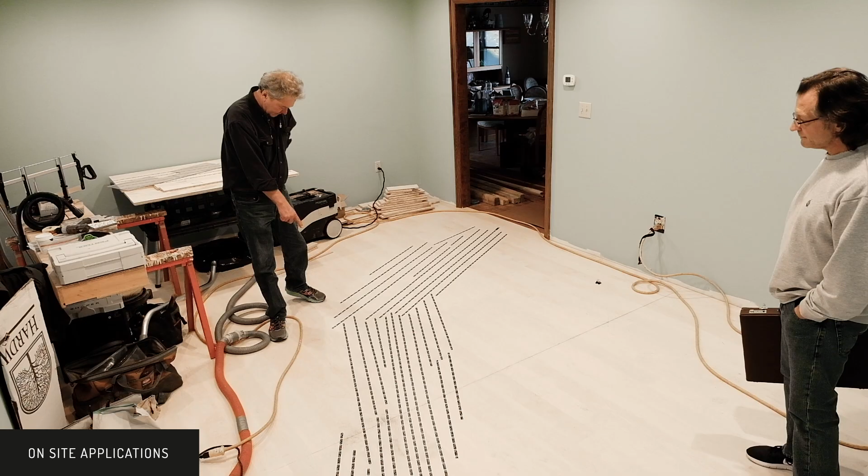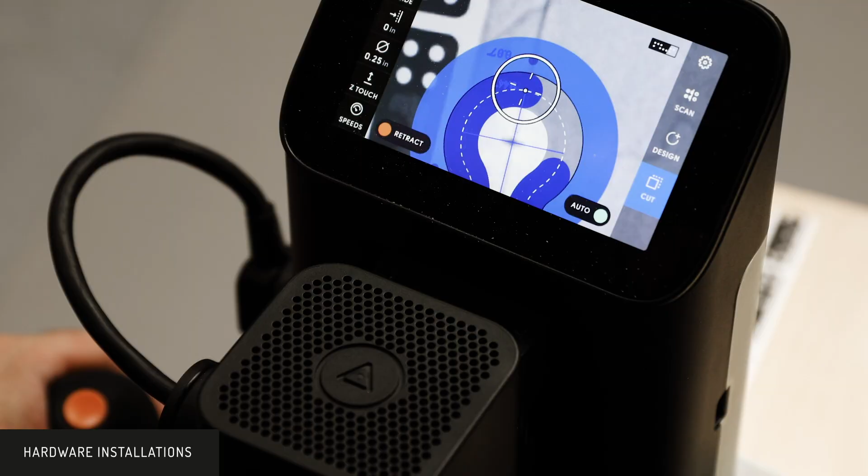Origin, handheld CNC, is designed for a huge range of situations, one of which is hardwood flooring. One of our customers, Mark Schaller, did this massive, 18 feet long, musical score inlaid into a floor, all live on site with Origin. It was actually done with a program called Adobe Illustrator, but you get the idea of the type of things we can do: inlays, medallions as we'll cover in this video, patching and repairing damaged panels, and hardware installation, be it vents, plugs, cable through holes, you name it. Origin can help with precision and accurate alignment and nesting of pockets and details in a very small, compact on-site package.

So this is what I'm talking about when I'm talking about medallions. These are all 3D renderings, but we'll have images of real examples for you to look at as well. These are all created in 3D using Fusion 360. I believe it's Jake and Noah who've been working on these. You can create the positive elements with the workstation in, say, quarter inch or less stock.

Set it up in the workstation using the shelf, cut the positive, and then cut the pocket on site. It doesn't have to be round, as is common with most medallions using traditional routers, templates and hole cutting jigs. We can cut whatever shape we want on site using Origin, with digital precision. So even things like coming back and removing another 1/1000th of an inch, we don't need templates. We get the precision on the job site, which is very uncommon for other traditional workflows.

Then there's the adaptability. We can change the fit with offsets, so we can take another 1/1000th of an inch off if we're unsatisfied with the friction fit or the glue gap we're looking for. There are often scenarios for various hardware where we can design everything on tool on the site, and we don't even need to bring a computer into the equation.

For this demonstration, we are going to design on a computer, and then we'll show the results of cutting it live. The process is: design on a computer, export all the parts. Then we cut the positive parts on the workstation itself — if there's a range of material, stock colors and things, you'll bring in the separate panels, cut all the components you want, and then cut the pocket in the floor, test fit it, adjust the offsets to get the perfect fit you're looking for, and then glue everything up, install, sand, and finish.

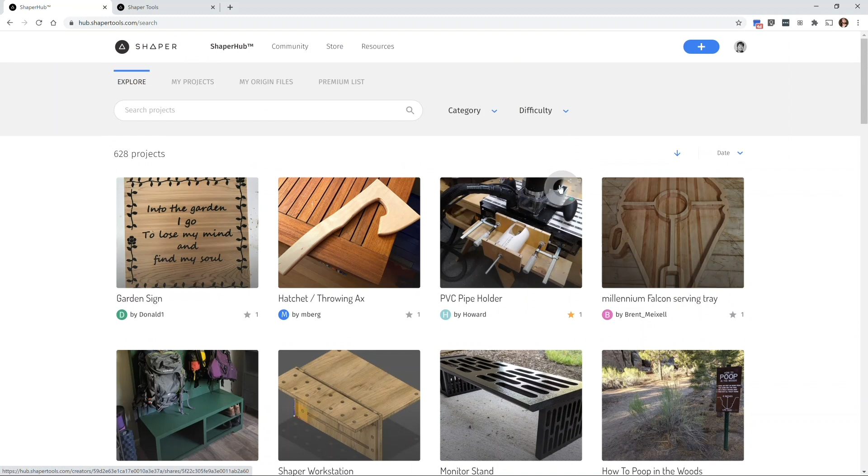So ShaperHub, I'm here at hub.shapertools.com, and we're looking at what customers have shared up on ShaperHub. We've got premium projects, a whole range of various hardware installs, cutter holders, you name it. The community is sharing projects, all free and can be instantly copied to Origin. We've actually uploaded a few — there's a section here where you can sort by category and type in flooring. So here's an example of one Jake did, another one. There's a lot of really cool stuff available already. I'm just showing you this because this is the way Assist will send you your files.

You'll have all the cut files here, the pocket, all the positives in the different materials, and the instructions for how to cut these files. This is the type of thing you would get back if you send in a project you wanted cut with Assist. It would be shared with you as your own private ShaperHub project.

Type in assist@shapertools.com and I'll show you how Assist works. You just submit your design request, receive a quote, and if you agree to the quote and the turnaround time, you submit it, and we'll send you back the project. That can span from logos, even just your signature if you want to add that to the bottom of your projects, and hardware installations, all the way through to full-on 3D designs.

The people working on Assist are very familiar with Origin workflows, so they'll help you navigate considerations like work holding and cutter selection. That'll guarantee you get a good outcome. I encourage you to take a look at that if you ever stall out.

And of course, there's always the community. These are all the different sections. You would go into design software and maybe click Fusion 360, then you can ask a question here. So long as you communicate what's going wrong, often the community will help you. And then there's regular email support to ShaperTools, support@shapertools.com.

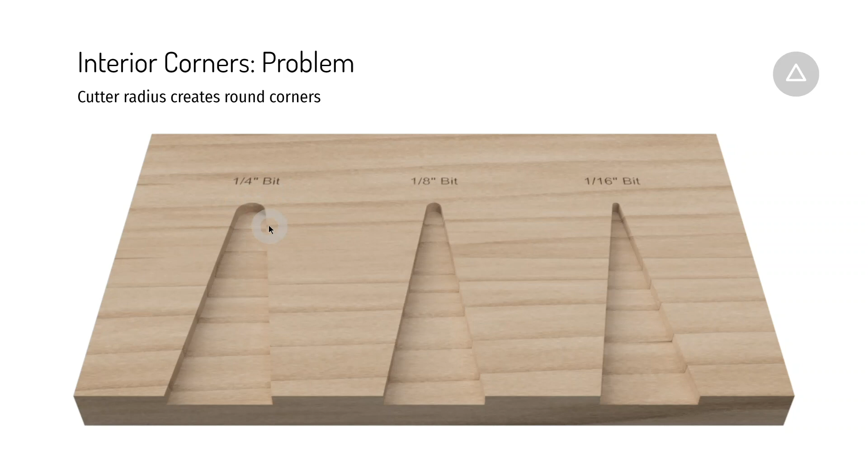Circular patterns. One other thing is we're going to be rounding corners. So even though we've got these points in this little star or compass inlay, if we were to use a 1/4 inch cutter, we'd get the corners rounded with a 1/8 inch radius. So obviously you can go to a 1/8 inch cutter, but it'll take you longer to cut that element.

Keep in mind, with Origin, you can change the cutters you use. You could clear all the center of this area with, say, a 1/2 inch cutter, and then come through and cut the perimeter with an 1/8 inch cutter to get you the details you need. You can take that further and go down to a 1/16. Just keep in mind there's a trade-off for how deep you can cut.

If you were cutting with a 1/64 of an inch cutter, the depth it would cut to would be, say, 3 times the cutter radius before it starts to get too unstable. So chances are that's not going to be a great idea. The alternative would be maybe you just want to chisel out those corners and keep them really hard-edged.

If you're happy with chiseling both the pocket and the positive element, you see how the corners get rounded in different ways - the inside corner is always where the material gets left. So if we were to bring these two elements together without chiseling the corner, they wouldn't fit, because this material would collide with this hard point. And likewise, this hard corner would collide with this rounded corner.

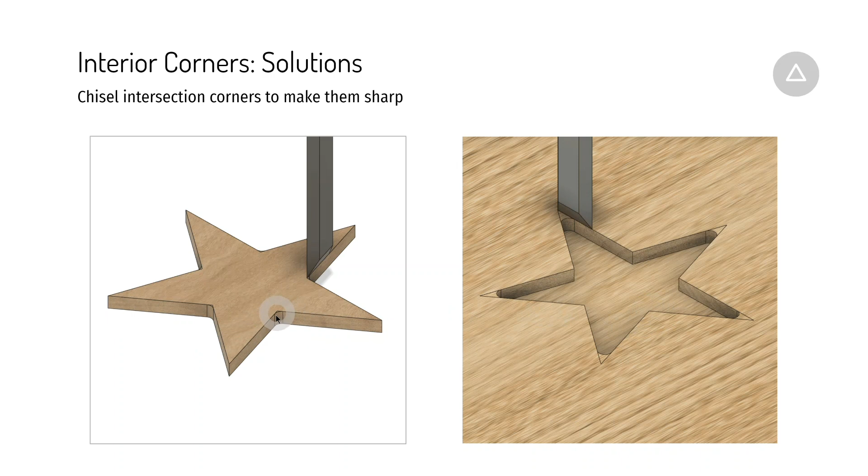So we'll get to Fusion and kick this whole thing off. Here's what we're presented with when we start Fusion. I'm in a 3D view. I'm just going to turn on the Origin over here - you can turn it on by clicking on these little eyes.

You can expand these, and this shows you all of the elements. So I'm looking at XY planes, lines, and the center point. This is what makes up the Origin - not ShaperTools Origin, the 3D Space Origin. So this is 0, 0, 0 in X, Y, and Z.

I'm going to show you here, up in the top right corner, how we can navigate. This is called the view cube, and it enables us to just orbit around. This is one of the ways to navigate.

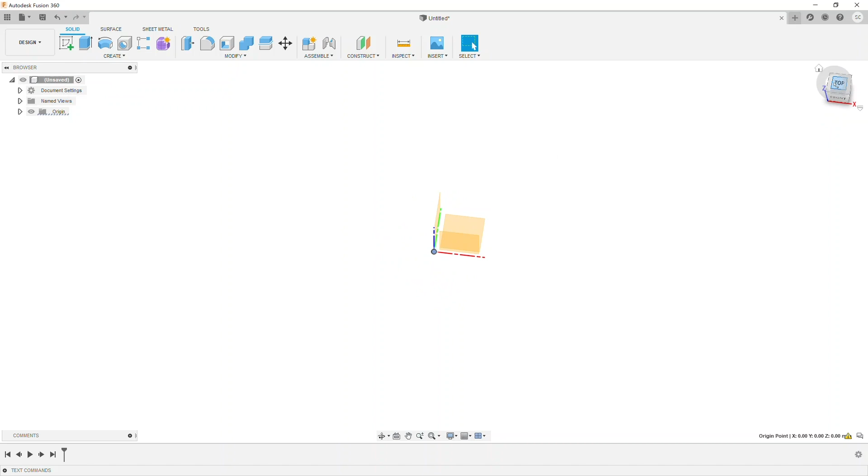And it's a quick way of getting a feel for where you are in 3D space. So if I want to view from the front, just click the front. If I want to view from a 3/4 view, I highlight that corner and it'll rotate around. If I want to view from the top, click that. There's also rotate left 90 degrees, right 90 degrees, go to the home view. There's a bunch in there to investigate. We won't get into that for this one.

The other way I navigate is with the mouse. So with the scroll button, if I click it down and drag, I can pan. And then I can zoom in and out. Just a heads up, the Origin doesn't zoom as a 3D object.

I'll just quickly go here and change my document settings to inches. Okay, that just means that every dimension I create is going to automatically be in inches. You can mix and match much the same way as you do on Origin, millimeters, inches, whatever dimension you want. But just for simplicity here, we'll get that into inches as the default, and then I can collapse that.

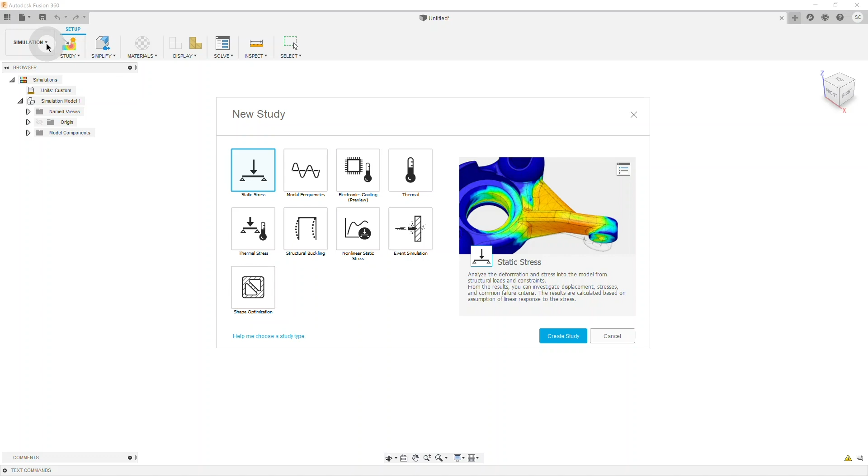Up here, I'm in design mode. So there's a bunch of other ones. If you ever end up in a strange one like simulation, this is all going to look very foreign. For all the Origin work we're going to do, make sure you're in design, and then most of it is going to be in the solid menu. So we're either going to be creating sketches, 2D drawings, or manipulating solid geometry.

So there's other options, surface, sheet metal, and one more to note, tools. This is where the Shaper add-on is. So this is how we export geometry to Origin. So it's a tool. This is where Autodesk presents it. We'll get to that later though.

So design mode, we're going to create a sketch. So that's the same as this button up here. First, we'll talk you through the shortcuts at the top of this menu. Then we'll show you all the options available down in the menu itself. And then I'm going to start using things like this, the shortcut.

So if I want to do an extrude, I can click here, or I can just hit the E button on the keyboard. And you'll notice beside a lot of these, there's shortcuts. So to keep things quick, we'll get into that. I'll show you what I mean by that. If I was to do an extrude, hit E, you'll see here my little screen thing is going to tell you what keys I'm pressing. Also, you'll see here the extrude options have come up, and you'll see up here the extrude button is active. So if I go cancel or escape, I can get out of that. So now I'm back to select mode.

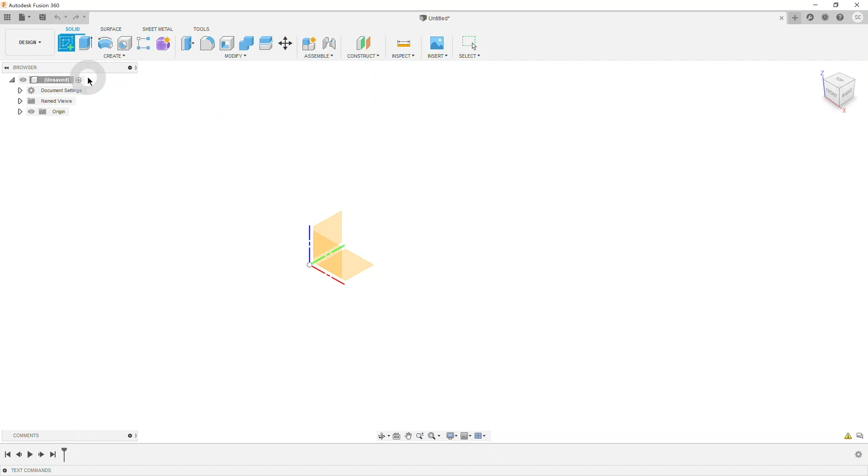So first things first, let's create a sketch. So I can either do it with this button here under solid, create sketch, or this button here. What we're going to see here is a lot of what happens in the viewport. Fusion's going to try and tell us what it wants from us. So I've activated the sketch mode, and you'll see here my cursor, if I hold still, is now saying select a plane or planar face. And you'll see down here it's kind of defaulted to whatever I'm selecting with the origin itself. So I actually want the XY plane.

So now it's going to zip me around. I'm viewing from the top. So what I mean by that is all it's done is moved my little view cube, or moved my camera, so I'm looking straight down on this plane, kind of like a plan.

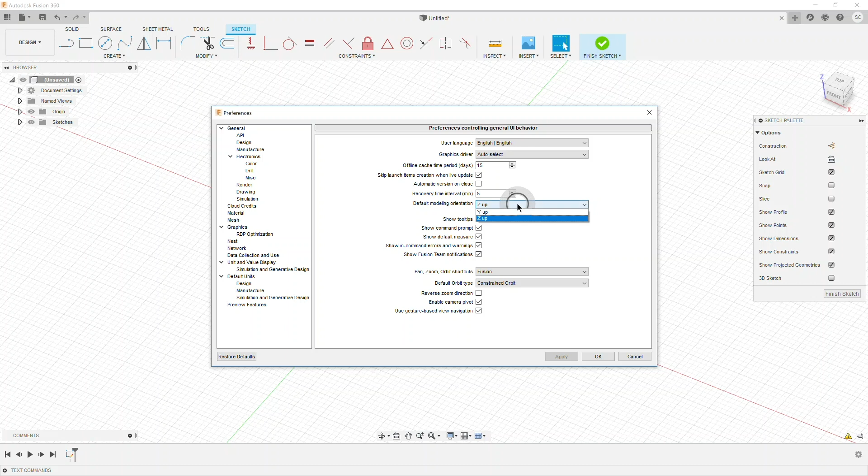Now you'll notice in my one, Z is up, so I'll just show you what we're doing here. So I've just gone to my profile and the preferences section, and then in the very top level under general, there's orientation Z up. So the alternative there is Y up. I believe Y up's the default, but for Origin and a lot of CNC work, Z is actually the vertical axis. So when we talk about Z and Origin, we're talking about the cutter moving up and down.

So Origin rests on the XY plane, this plane that we're drawing on, and the cutter moves up and down in the blue Z vector axis, however we want to refer to that. So we are now in sketch mode on the XY plane. It's created this menu here. Once again, get familiar with this, open it up if you ever don't understand what's going on.

Everything in your file is contained or represented in here as a little drop down. So, the origin has all its elements, named view, top, left, right, they're all there. And then our sketches start to populate down here. So this is where we start to create our geometry that we're going to then extrude or convert into 3D geometry. So this is just 2D lines.

And you'll notice down here, this is our history. So as we create more elements, they're going to accumulate down here. And we can actually, with this little bar, scrub through time to go back and edit things earlier in the design process, should we change our mind.

So with this sketch active, we notice we've left solid modeling and now we've moved to sketch mode. A quick thing to check, I always do on the right-hand side. If I'm ever in sketch mode, I'll see this big green button to finish sketch mode. So these all are settings, either creating, modifying, or constraining elements in 2D. So that's what we're going to manipulate in sketch mode, and we can get right to it actually.

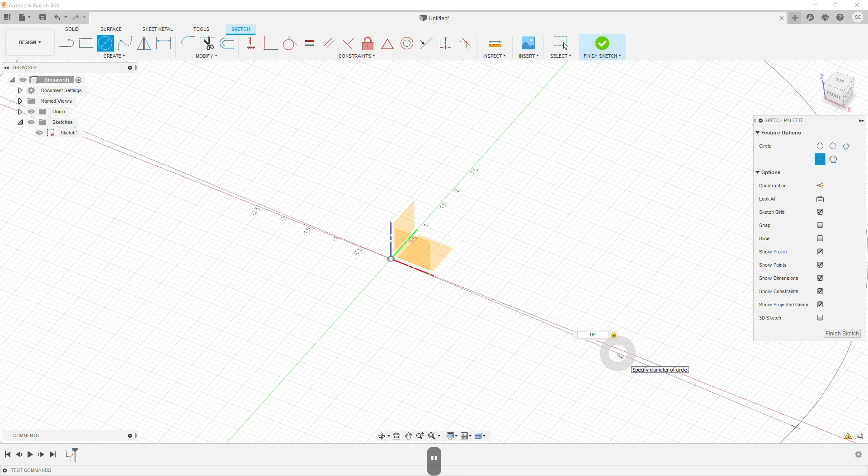You'll also notice as I'm entering this, the fact I've entered it, it locks that value. So you can see the little yellow lock symbol next to that data entry, and because I'm in an inches project, I don't need to enter, like I could do it like this, but I don't have to. The whole project is in inches, so it's going to assume inches if I just do 16.

Right, so now zooming out with the scroll wheel and the center scroll button to move around to center it. We can also do fit, and we'll automatically fit to our geometry. This is where we do a lot of the view manipulation as well as the view cube. So we have a 16-inch circle. Notice I can move this diameter. So this is called a dimension. I can move it. Doesn't matter where it is. This is just a value attached to this.

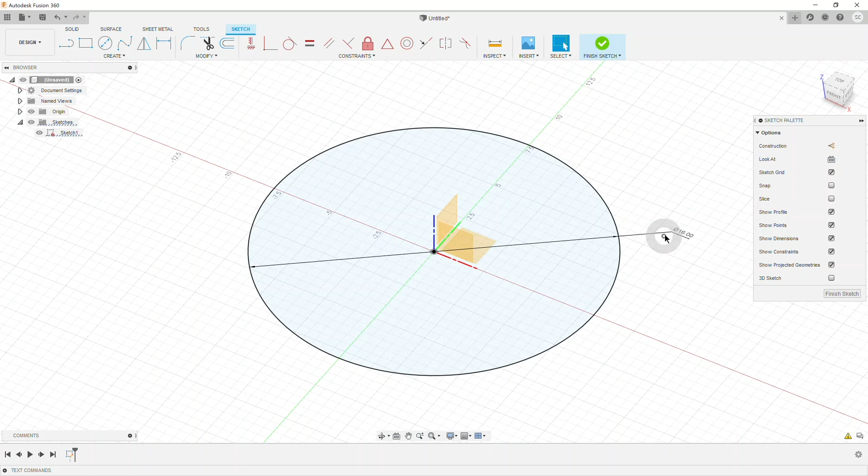I can actually also right-click on it and say toggle radius, and it's going to switch to half the diameter, which is the radius. And we can always toggle that back. I can also delete it. So see how it's highlighted blue? I've clicked on it and then hit delete. And you'll notice my geometry now goes blue. So it was black, which meant it was fully defined or fully constrained.

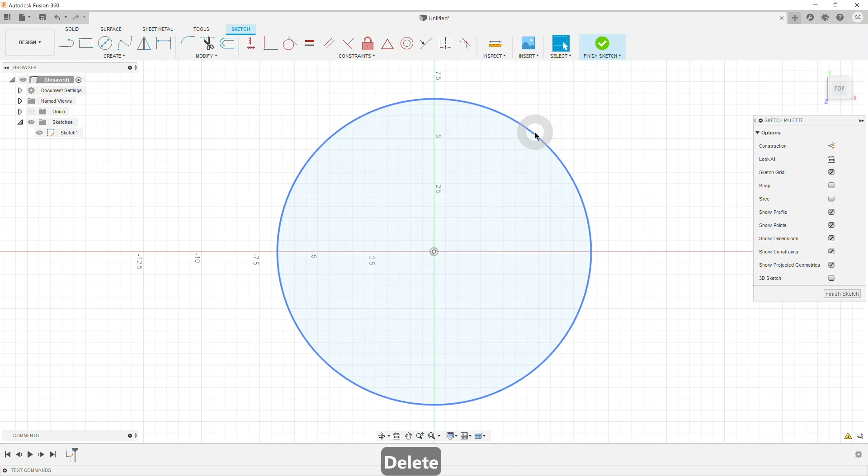So we are constrained to the center. That's actually this coincident constraint. I'm actually going to view it from the top down for simplicity, and I'm going to hide my origin. So you'll see here, the center of my circle is constrained to this center point, which means I can change the diameter now because I've removed that diameter value, but I can't change the position. It's locked to that. I could then go in and highlight that constraint and delete it. So I hit the delete key. Now what we have is a circle that can be moved anywhere.

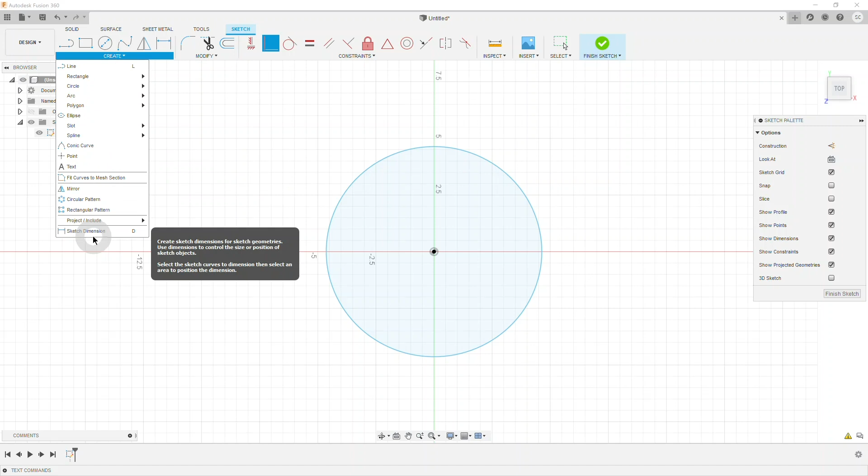Now I can take that circle and set up those constraints again by hand. So I can go, I want to make that center point coincident to the center of my world. And then I want to make my dimensions. So the D is under Create, Dimension, and then I just highlight the object I'm dimensioning, and you'll see it's now defining a dimension. I click where I want it to be drawn, and then I enter 16.

So we're back where we started. We have a 16-inch circle, and it's constrained at the center. So it's rendering as a black line. Everything is as we wish. I hit Escape to get myself out of that dimension mode.

And now there's one more thing we're going to add here. This curve is producing what we call a profile. Just keep that idea of a profile in mind. We're going to move on to creating a line. So that would either be under the Create Line shortcut or Create Line. We can use the L key as well under the Create menu.

So with that active, if I hold my cursor still, it says Place First Point. And if I highlight on the line, you'll notice a little cross pops up. So that means I'm constraining to another curve. So instead of having to, create a line like this, and then I'm going to go Escape to complete this. Now these points are just 2 points floating in space. I can move them wherever I like.

I can then go Constrain to there. So that point now is constrained to this curve. I'm still in constraint mode, so I'll hit Escape. What that means is I can move that anywhere, and so long as it's on that curve, it will draw and adapt to where I drag it. And the same applies to the top. So I can go Constrain to that. So now I'm constraining to, I'll hit Escape again.

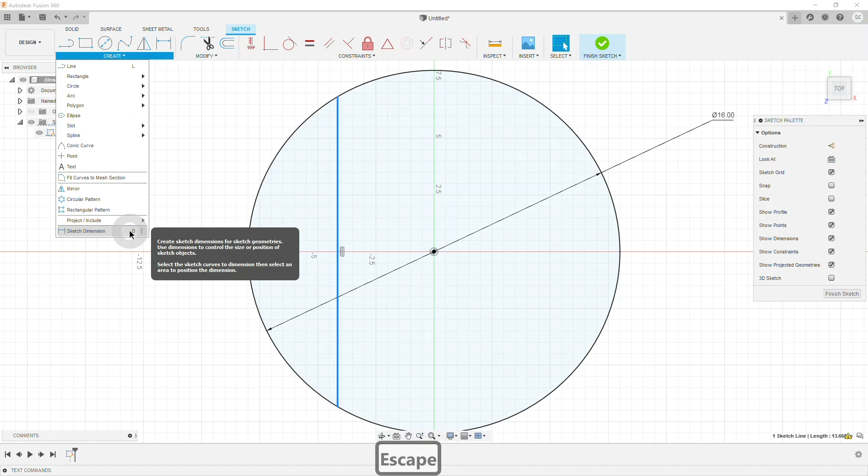Now I can tell it, I want this line to be 10 inches tall. And you'll see now it's got constraints on it. So it has to be vertical, has to be constrained at the top, has to be constrained at the bottom, and has to be 10 inches. So now it's no longer a blue line, it can only be there. It actually could be over here, but we'd have to reconstruct it to get it over there. Now we can also do things like, I'm going to delete that length. So now you see it goes back to blue.

Now I'll do D for dimension again. So I've selected the line. It's going to assume I'm measuring the length, but I could actually then select something else. Now you'll notice it's measuring the distance to that center. So I could tell it I want it to be 3 inches from the center. That's now fully constrained. Because my circle's constrained at the center, top, bottom, vertical, there's no other way that can resolve. So that's the basic idea of that.

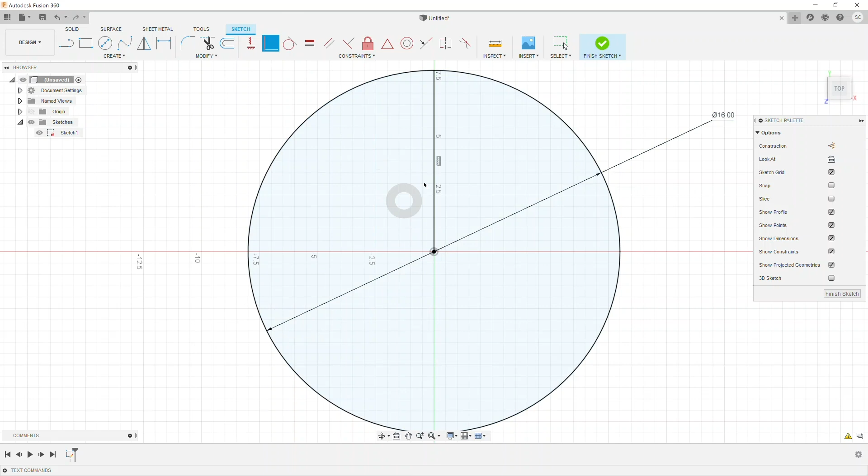I want this line to not be constrained to the bottom. What I want is to move this point and constrain it to the center. So I'm going to go Constrain to Center. So now, once again, that is a fully defined shape, fully defined line. And now we're going to start to use this to construct our compass.

So let's see here. I'm going to go Create Circular Pattern. Ordinarily, we sort of shy away from patterns and things for a while, but for medallions, it's just such a fundamental concept, we're going to get right into it. So it's taking a defined line, and then it's going to rotate it around here and duplicate. So I'm going to choose the center point. It defaults to 3, and we want 8.

So now we have lines all the way around. We go OK. It's a little confusing in that we have this line, but you can see there's 8 lines. And what's also cropped up here, which is actually quite interesting, is this pattern info. So we created 8 new elements that rotated around this center point when we did that pattern. If I double click the pattern icon there, I can adapt that. So I could go, oh no, I want 7, 6, 5. We'll put it back to 8.

Just keep in mind, inside your sketch, all of these little icons, so you can see here, it can actually get kind of frustrating. The constrain to center icon is almost overlapping with the pattern icons. You just have to move a couple of pixels to get exactly the one you want. So you can go in and edit that.

Notice we still only have one element in our history. So whole sketches are treated as single history elements. That's good to keep in mind. So it's a good idea to often keep your sketches as simple as possible, just because they only present as one thing in your time history. So now we're going to get into more of what we've just seen.

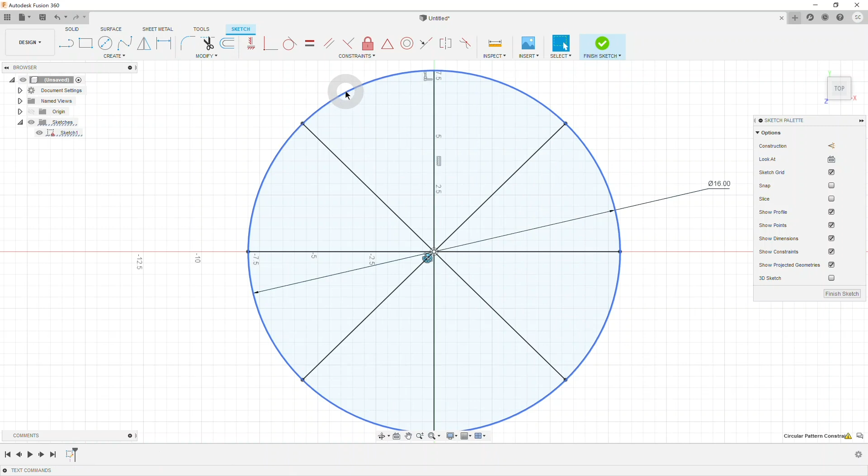I'm going to make the outside one a construction line. So what's changed here is this has gone from being a full geometry creating line to a construction line. So we can toggle back and forward between this. The dotted line is a construction line. And what's different there is we now create what are called profiles. The diameter thing doesn't contribute to profiles, but all geometry that intersects and creates closed shapes contributes to profiles.

So what's really cool about this is these closed shapes get really powerful with Origin, because that's exactly what Origin uses as well. We want to create often closed vector shapes to create our geometry that Origin cuts. When a shape's closed like this, we can cut a pocket, we can cut on the outside of the line, we can cut on the inside of the line. Everything there is closed and complete in a way that Origin understands.

So if we go and turn this into a construction line, you'll notice it no longer contributes. I can't select these areas because they're not closed shapes. It treats the construction line as an open shape. So as we start adding more lines to this, we'll be creating closed shapes with the goal of creating geometry from them that we'll send to Origin for cutting.

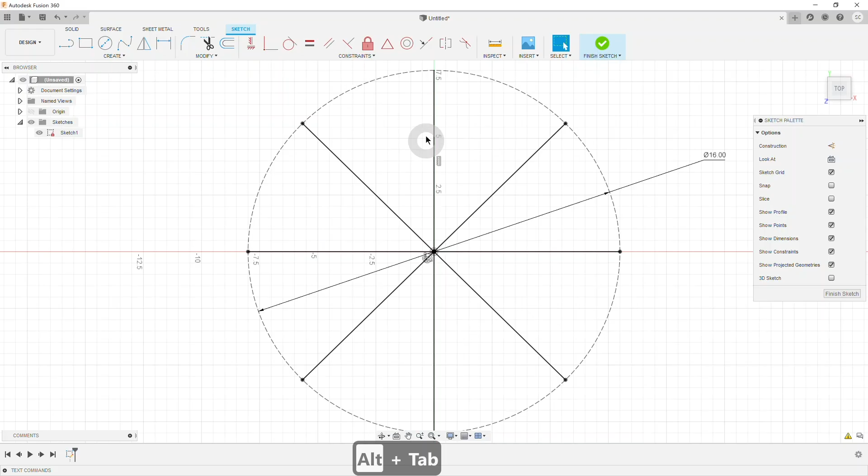So now we're going to create the little vertical elements. I'll actually zip back to our demo. At the moment, we just have the big main lines here. We're going to start to create these lines and get them all constrained and ready to go. So we're going to start at the center and work our way out. And then we're going to add little radius details here, here, here. We're not going to spend a lot of time doing each and every one of these. We're just going to do the unique ones at the top and then duplicate them using that same rotational pattern technique. Let's create a line.

Because we've made this diameter 16, we know we can snap to that top point. You'll see it turned into a little square. And then we can either enter data for the length, or I can just snap to another point like this. And now I have a line. I'm going to hit escape, otherwise I'm still in the line creation mode. And you'll see it's constrained at the top and it's constrained at the bottom. So I can move this. The reason I can move it is because this one's blue, it's not fully defined.

But we know that that is the way we describe where this is; we're going to draw an arc between these two. So if I hit the D button, which is the same as going create dimension, I'm going to click on this element and create a dimension. So that one is 6 degrees. Now you'll notice it's gone black. It's fully described. I'm hitting escape again to get out of the dimension mode. And now with this shape, I've started to create my actual geometry that I want for my final export.

So I'm going to just do its mirror. We could mirror it. So L, and then dimension, enter. I can actually, this is fun. Rather than hand entering 6 again, I can click on another dimension. So it's saying dimension 9, which is that one, and then hit enter. So it comes up with a little FX. I'm going to go escape, move that down, which means it's inheriting from that. So if I change this to 12, you'll see that both of them update. So I'll put it back to 6, and it updates. We are good to go.

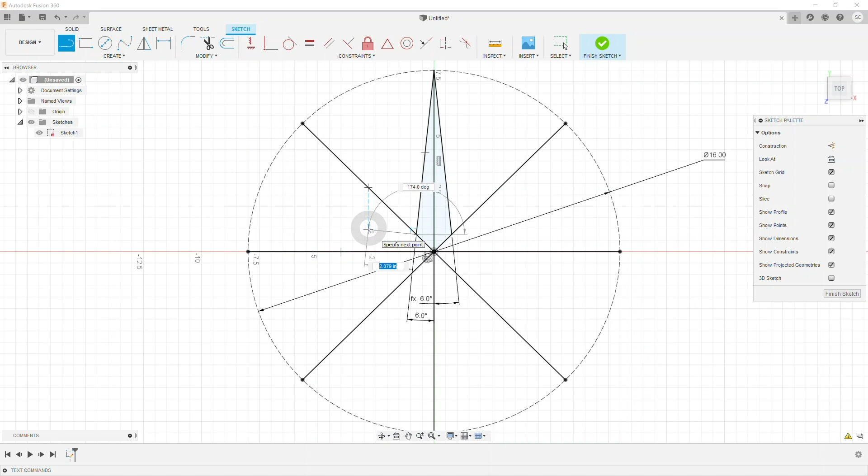Now I'm constraining it to this line. You'll notice a little 90-degree angle popped up there, so I could constrain it to that other line at 90 degrees. There's another 90 degree to the arc up here, and it can also be collinear to itself. Often, if you hover over a particular line you're interested in, and then move here, you'll notice it will prioritize that line.

So whatever line you've highlighted most recently, it will try and do a constraint related to it. You can see I'm parallel to that line down there. For this one, I'll just get it up and running. Now we've got 3 of those, called profiles, areas we can create solid geometry from, and export data from, should we want.

Now we'll do the secondary little points, so we'll do these guys. They're 3 inches out and 8 degrees from the center. So 3 inches from that point to the tip, and then 8 degrees on either side.

I'll go L, and then I can put this anywhere. Oh, you'll notice this one's a good one—this triangle means it's in the center of this line. So if ever you see that, you're snapping to the center of a line. That one gets pretty handy.

But because I'm going to use constraints to define this, I'm just going to put this in casually wherever I like. I'm still in draw mode, snapping to that point—see how it becomes a square? Then just bring it down, snap to this line. That little dash tells me that's aligned to that.

So then I can go D for dimension. I don't want to describe the length, I want to describe that arc, and we said that was 8. We'll do the same on this side.

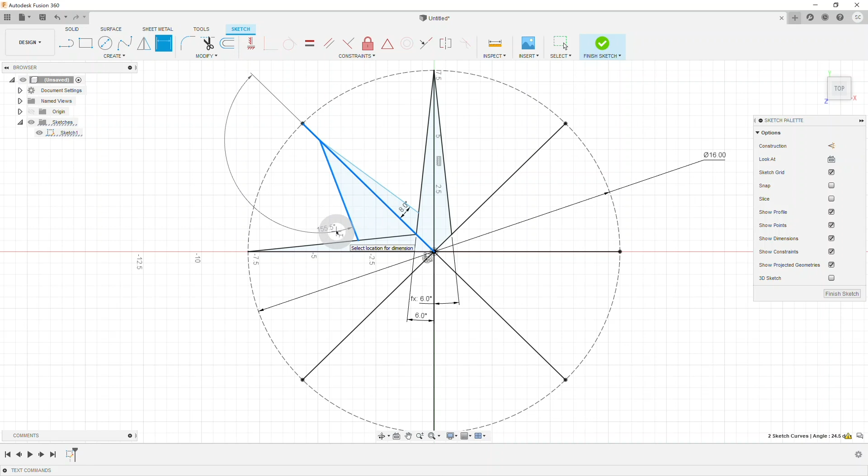I'm still in the dimension mode, and if I click on the outside, notice I'm describing a different arc. So a lot of these things are based on where you're clicking. Just be mindful of what Fusion is trying to tell you as you click—move around and look for a spot that's constraining to the right elements or measuring the right arc.

So to define it fully, we go there. Now this is interesting as well—I can define my dimension to be vertical, to be the hypotenuse or whatever, the total length, or horizontal. Just keep in mind, once again, move around and Fusion will tell you what it's trying to do.

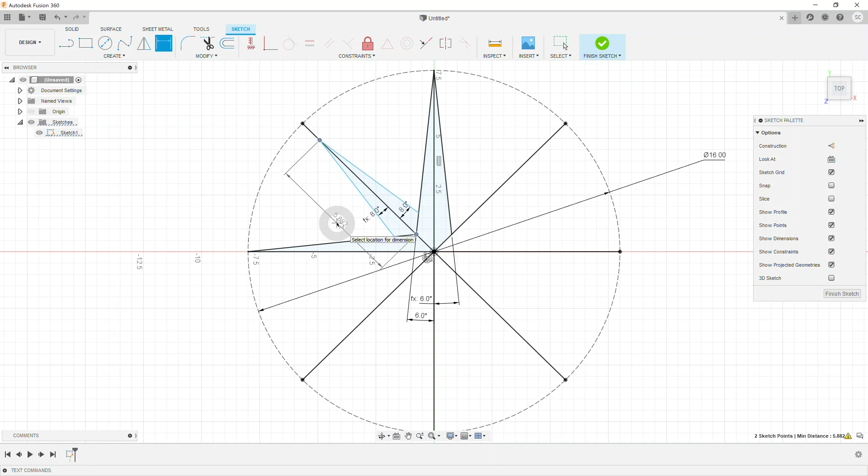So if I click here, I get 3 inches, and now these are the unique elements, 1, 2, 3, 4. We got one little star in the middle, so I'll do that as well—this little star, where 1.181 is the length from the center, and it's 16 degrees. Let's just arbitrarily click there, on the line we know we want.

So now we get escape. If I select this, we know our constraints are correct. Now it's a matter of entering our dimensions.

So I've actually started with the line selected, so I'm going to hit escape. What I actually want to measure is the point to the center. So D, and then select the center. Come over here, 1.181. Still blue.

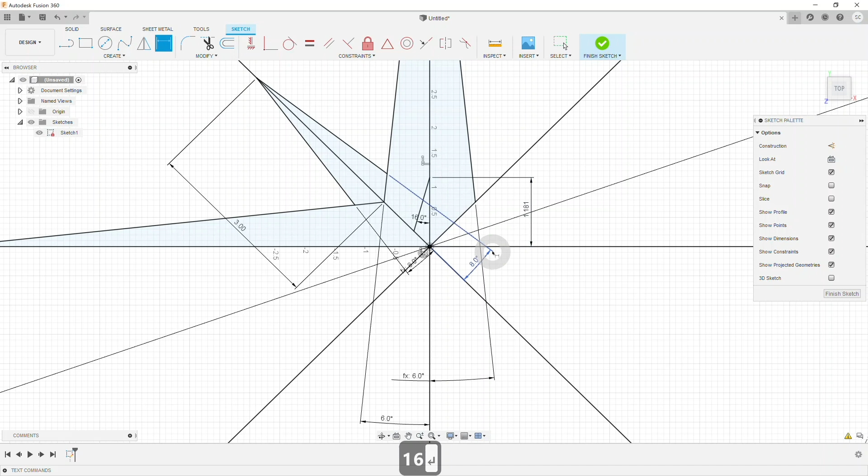We've got some more to describe here, so I'm going to select that and tell it it's 16 degrees. Complete it with this. Now if I come over here, it's going to dot a line, so I can be constrained to that, just matching that. But if things change, this is not constrained to that—it just matched that. So I'm going to do the same as we've been doing: dimension the angle and then select the angle it's the same as.

We could do stuff with mirrors, but we'll keep it as simple as possible for now.

Right, so I now have enough geometry to get this process underway. So let's leave the sketch.

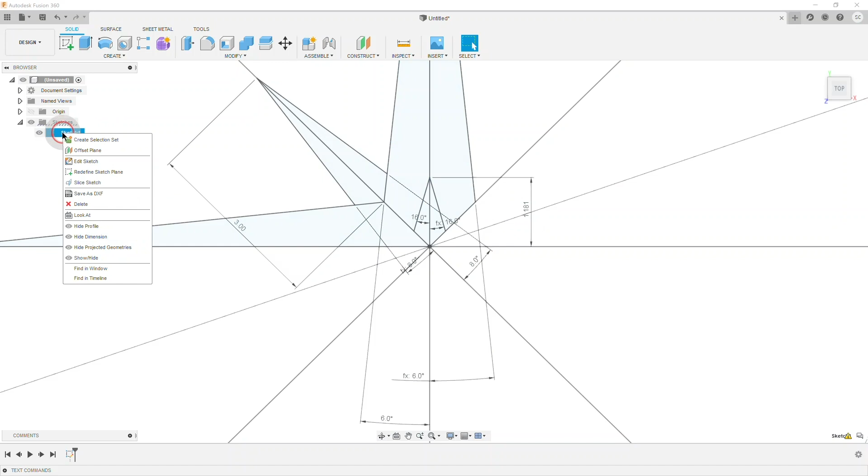You'll notice we've gone back to solid mode and our sketch dimensions are no longer visible. Should you want to see them, they get pretty cluttered once you have a bunch of sketches going. You can right-click on the sketch and go Show Dimensions. So even though I'm not actively editing this sketch, these dimensions are visible. I'm going to hide those and zoom out.

I'm also going to hold down, this is another navigation tip, on Windows, Shift and middle scroll wheel lets you orbit. It's the same as grabbing the View Cube or the Orbit button down here. So there's several options for all of these. I like to use the shortcuts in the mouse, but you use whatever works for you.

So we now have this profile and this profile. I'm going to extrude this. I can click the E button, or click this button up here, or find it in the menu under Create. We'll use the menu option.

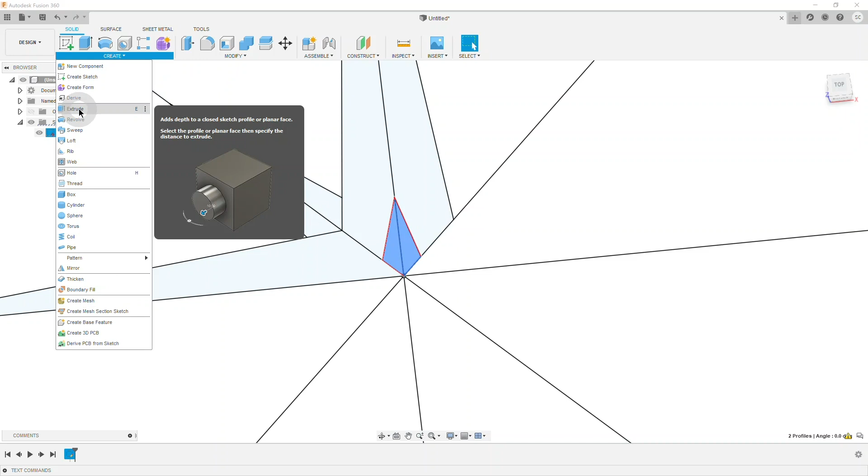You notice this is highlighted, and our settings for Extrude have highlighted. If I hold my cursor still, it says select sketch profiles or planar faces to extrude. So I can either add more or select them again to remove them. It's pretty quick to get up and running, and you'll see here every time I add or remove one, this is just left clicking, this number goes up or down. So just double check you've got the right number of things active here, and we should be good.

Now, one other tip that's kind of cool: if you're working on a sketch, it's tempting to do a positive extrude, but then if you're doing more work using that sketch, the bodies or geometry you create, we'll do it positive just to show you, 0.25 inches. So I'm extruding up towards me above the sketch, but they're going to occlude the sketch. I won't be able to see the sketch once I accept this.

Well, there's more to it than that. When you create geometry from a sketch, you might see it like this. Everything looks fine, but your sketch vanishes. So if I turn the sketch back on, I can see it. Now, the problem here is I can't really interact with my sketch properly anymore. I'm selecting, you'll see there, I'm selecting the geometry instead.

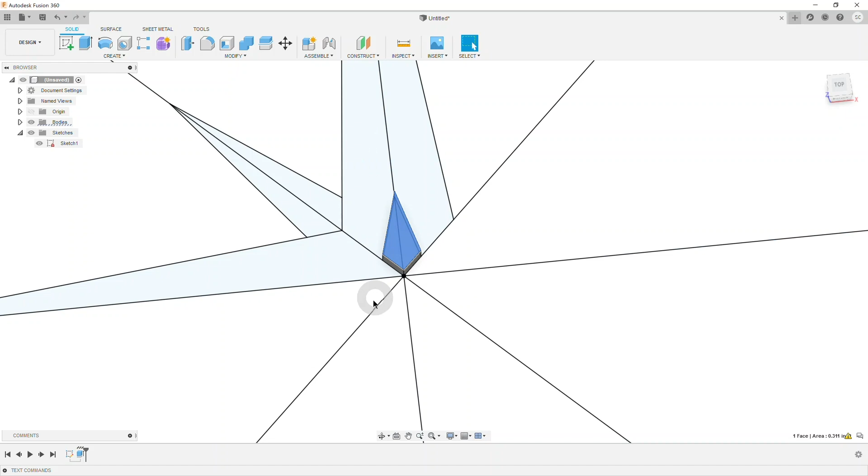So what's cool here is we've created the extrude positive, so it's above the surface, but it's created a history feature here, which is the extrude feature. So if I right-click on that and go Edit Feature, you'll notice all of my settings are still available, so I can go back.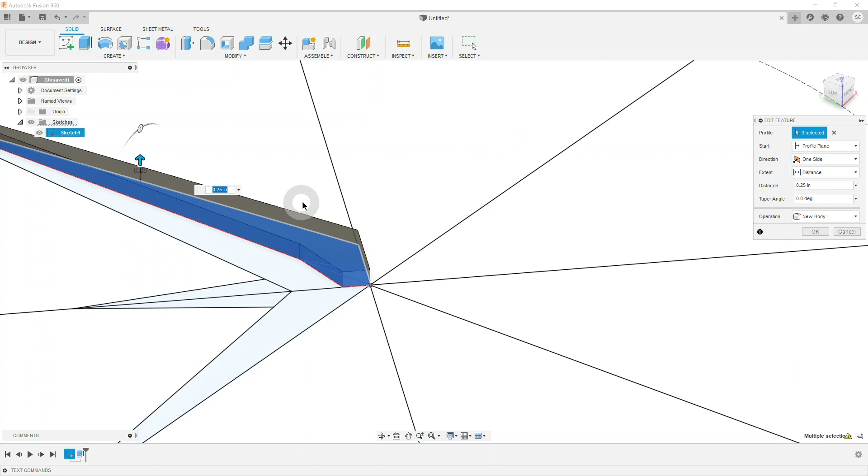One thing to keep in mind, if I hold down Control, on Windows anyway, the feature vanishes and I can select more elements. We don't actually want to do this, but just see that's an option. So Control lets you add and remove in the feature menu.

Now, I'm going to want to make this negative, so we're going to go negative 0.25. This is kind of handy in that now the sketch is on the top and everything's below it, kind of like what we're actually creating on the floor. So just keep that in mind as an option.

So these are all the settings. We can have an offset plane. I could do this below the surface, so 0.2, negative 0.2. So there's a lot of different options here for how we create our offset. We actually want to do it using that 0,0 plane as our reference.

So I just encourage you to get in here and experiment, especially given we're creating features here that can be edited later. There's no harm in experimenting. You can always go back to what you were doing.

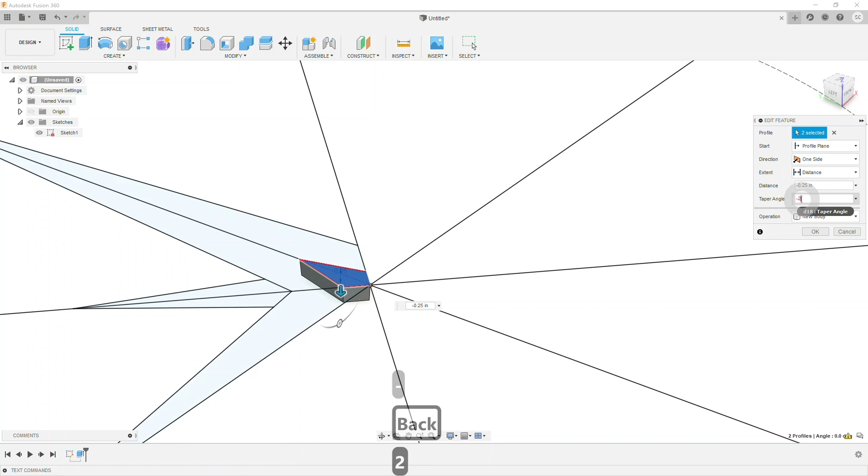We won't get into the weeds here. We're just defining a distance we want to extrude. Negative is down, and we can taper it if you want a draft angle or something. So 2 degrees, you'll see that. Update, it's getting wider. Negative 2 will get smaller. We'll do negative 20 to exaggerate it. We want 100% vertical lines, no taper here.

And then what's interesting, we'll find in future, keep an eye on this, new body is what will happen if this is all updating live. So if I had geometry that existed here, I could either be joining to it, cutting into it, intersecting it, or creating a new body.

If you're going to use these elements later, chances are you're going to want new body. But just keep in mind that Fusion's going to try to select one of these for you based on what it thinks you're doing. Once again, if you get it wrong, you can just right-click here, come back and change it.

So we'll do a new body, create this geometry. Now we need to rotate that around the center. This is new body, so it's now called SSS. It could be called anything we want. It's going to get consumed when we create a pattern here.

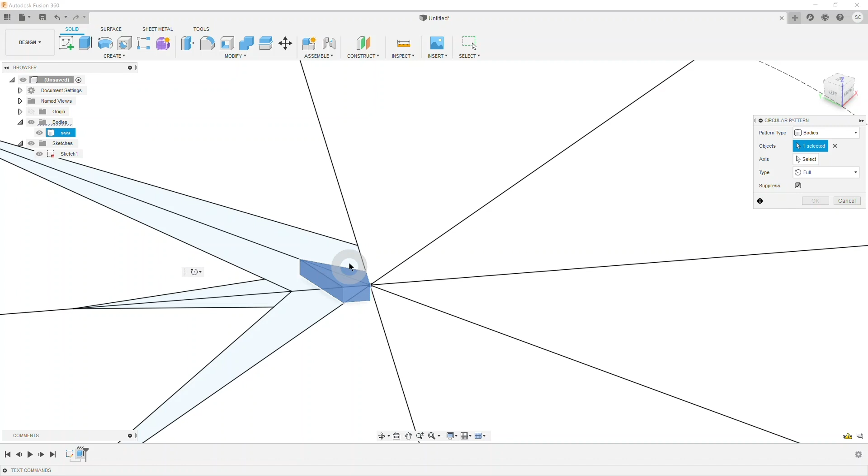So we'll do that first. Create pattern, circular pattern. This is just a quarter of our little center star. What axis do we want to use? This has actually temporarily made our origin visible, so I want to rotate it around this center blue line. It defaults to 3, put that to 4. Now we have a complete element.

We could disable one of them or enable it, but that's the idea of pattern. I'm just going to hide the sketch for a second so that it's clear. So what we got here is it adds 1, 2, 3 to it. So we've got 4 elements here.

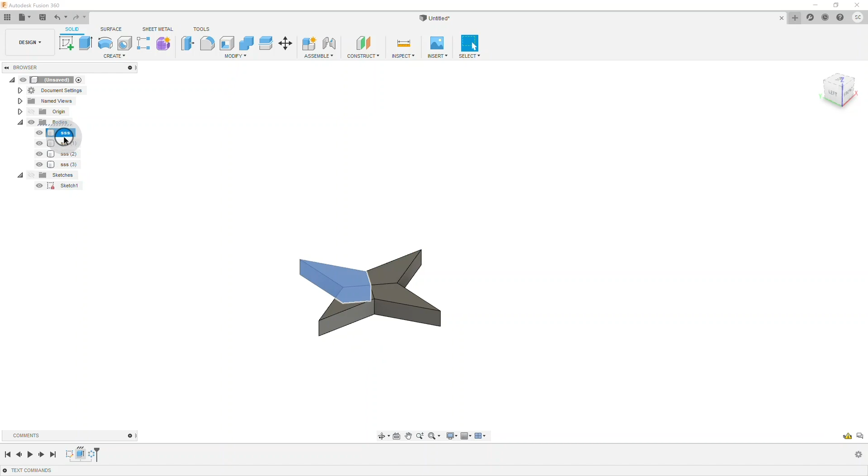We want that to be one solid piece of geometry. So you can see here each piece, I'm selecting faces, is a separate element. So we don't want to cut those separately. You may do—you can definitely export them separately and handle them how you want. But for this demonstration, we're going to combine them.

So we're going to go Modify, Combine. This is similar to that Extrude option where we had the option of cutting or joining. Now it's going to take these 4 elements—1 is the target body, and then 3 are the tool bodies. So they could be, once again, joining, cutting, or intersecting. We're going to combine them all into one, and we're not going to keep all the spare components.

Like if you were to cut a hole in this, you could tell it to get rid of the item that was cutting the hole, and that's the default. Or with this keep tools on, we could keep them around. In this case, we want one piece of geometry that takes all of these and joins them together. So we'll do that now.

Okay, and we'll call this center star. The reason I'm naming this here is for ease of finding things later. Also, when we export them to Origin, this will help a lot. I'd encourage you to do that.

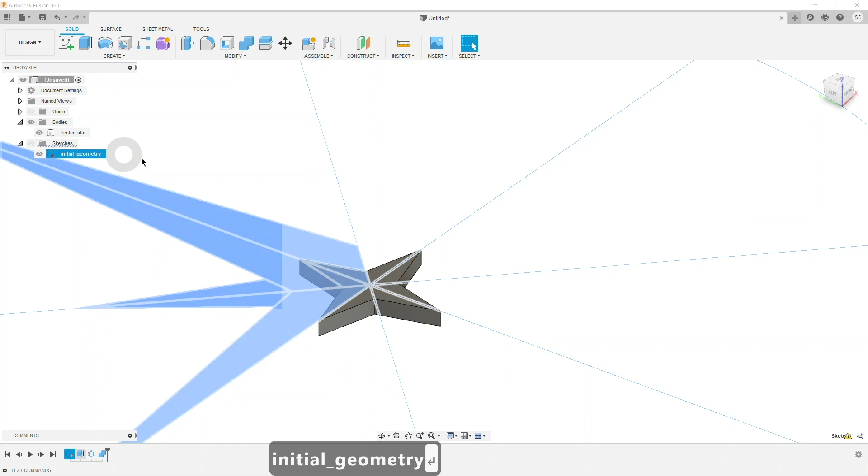Even we'll do this now to the sketch—initial geometry. That means, once we get 6 sketches or something here, we can keep track of what we're doing here.

Right, now back to creating our geometry. That one's all good. Now we're going to start to make individual elements here. So I want to turn my sketches back on. We are first, while we can see in here clearly, going to fillet these edges.

You can see these corners are rounded. There's a few key corners we're going to want to round. So if I select an edge, you'll notice I can select faces, I can select the whole body, or I can select individual edges. You'll notice here I get a readout of the length, or I can select points, so I get a readout of its position.

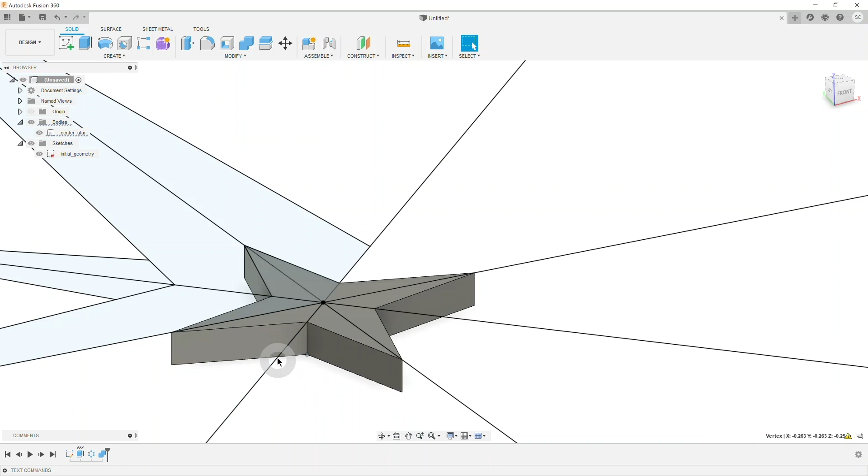So I'm going to take that edge and go Modify, Fillet. This now lets me round that. I'm going to do 0.08 inches. The idea here is it's approximately the radius of the cutter you intend to cut with, plus a little buffer for if you're doing offsets and things. So if I'm going to use an 1/8 inch cutter, that would be 0.0625 plus a little bit. For the offset, we'll just do 0.08. And that lets me visualize that.

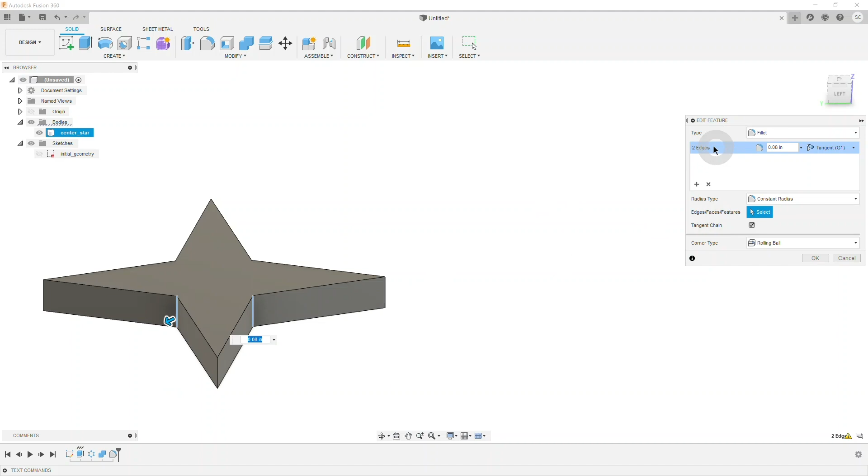Now, let's say I want to do it to these other corners. I'll turn the sketch off momentarily—I can turn off all sketches or a particular sketch, so just keep that in mind. I can turn off all bodies or just one body. In this case, it's going to look the same because we only have one of each. But down here, if I go Edit Feature, we can use that same technique we were talking about. I can hold down Control and highlight the other edges. You'll see here it's saying 2 edges, and it keeps my radius I have entered.

What's kind of cool about this is I don't need to orbit around. I can project through the geometry and select these other edges as well. So with that accepted, I've got 4 edges, and I hit OK. We're good to go there.

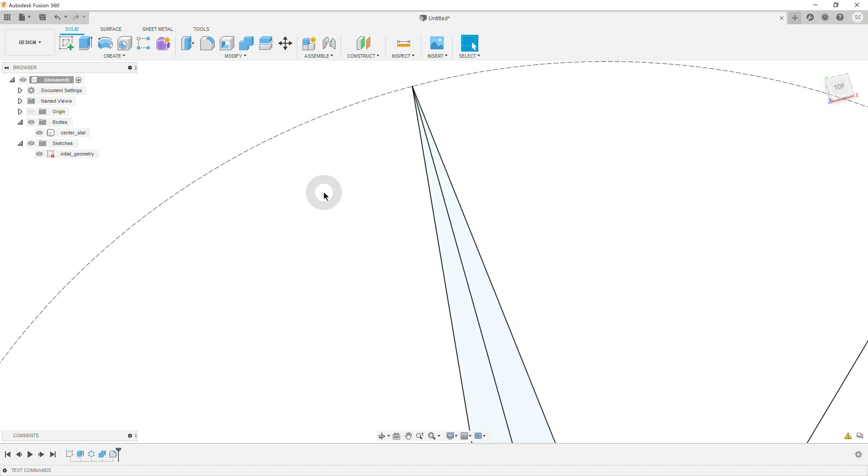So I'm going to turn my sketch back on. That means this is exactly the geometry that can be cut when we're pocketing on the inside. We're just going to keep an eye on that as we go so that each element gets the correct radius. These points here are examples of areas that the pocket is going to need to have radiused by that same radius.

So I'm going to go into the sketch now and double click it. You'll see here it jumps to sketch mode. I'm going to put an arc that bridges these 2 profiles. It's easier to do it here rather than on the solid geometry. We just did one fillet on the solid geometry, but we can also do it inside the sketch itself.

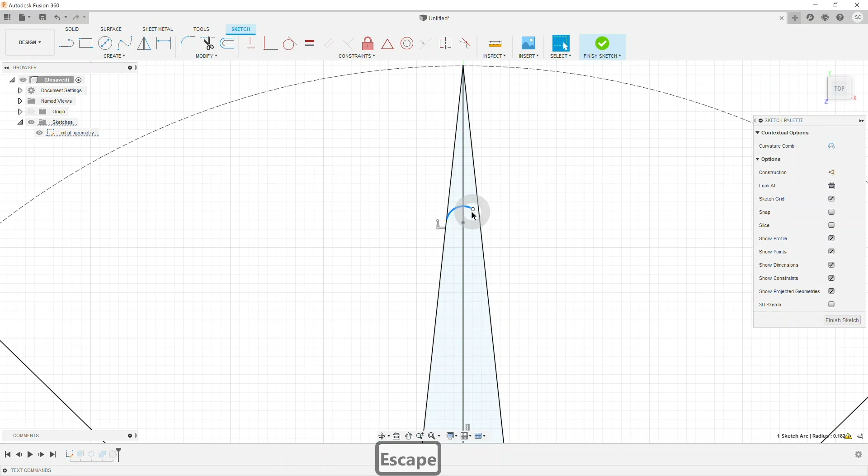So if I make an arc and make it a center arc, I can click kind of anywhere here. We're going to actually dial it in using constraints, and then click there, and then click there. I've now constrained this - we'll show you the constraints to both edges. So constraint, constraint, and this is constrained. We don't have a diameter of this element, so it can kind of float around and do weird things.

So I actually want to give it a diameter, so I can do that with the D. In this case, it's a radius because it's not a complete circle. And that's good - we don't have to do any math. We can go 0.08.

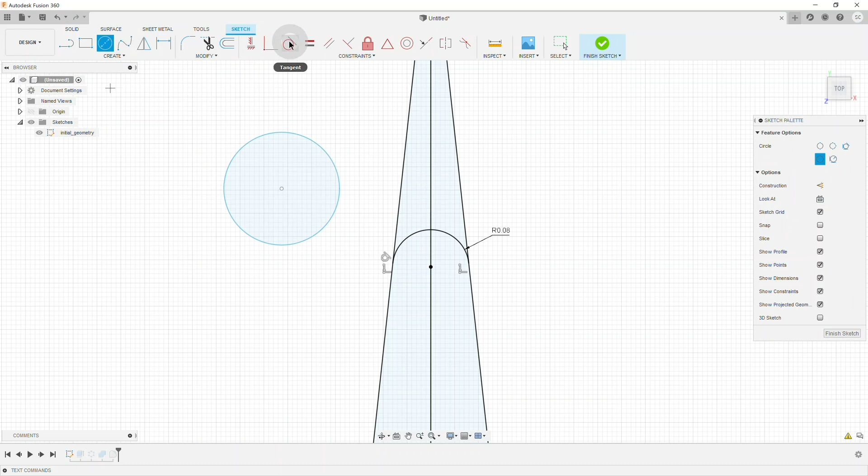And now I'm going to want to constrain this. I don't just want the tip, the point constrained to this edge. I actually want it to be tangent to the edge. So I'll show you what that means by drawing a circle out here. If I click that and then I go, I want to make this circle tangent to this, it means it touches that edge at one point.

By doing that, because this is a symmetrical object, I only need to do one side, but that guarantees me I've got the radius and it touches that at one point. It doesn't intersect it at some strange point along the arc. So that's that corner defined.

We'll do the same thing here. It can take a little getting used to these arcs. So create arc, center point arc. You start with the center point. If you just hover still, it's going to tell you what it's looking for - so center point, another point, another point.

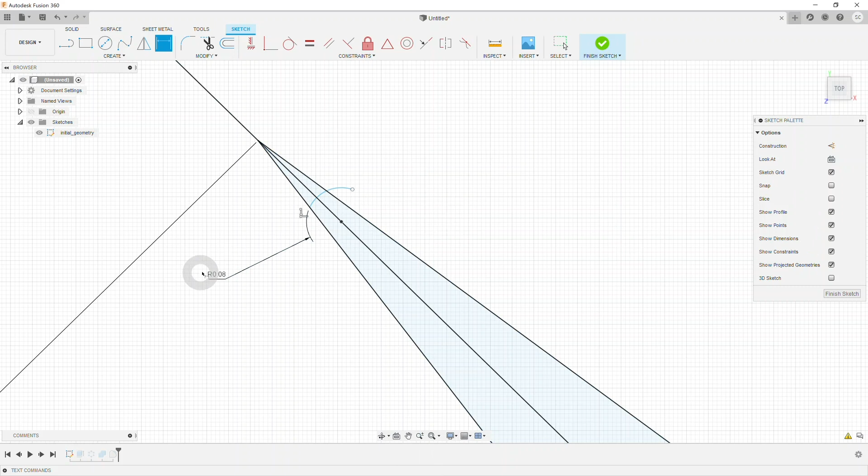Select the curve itself, select radius, 0.08. I could find the arc to do that, to reference, but we'll just enter it here. And then I will do the tangent here.

And this, we have to keep a close eye on this. I do want - see if I select here, it continues through. Because there's a gap here, my profile continues beyond that, whereas this one, it comes to a point there. So I need to actually constrain this to this - that's the point constrained to this edge. That just makes sure that my arc comes around, and now we can confirm we have separate closed shapes.

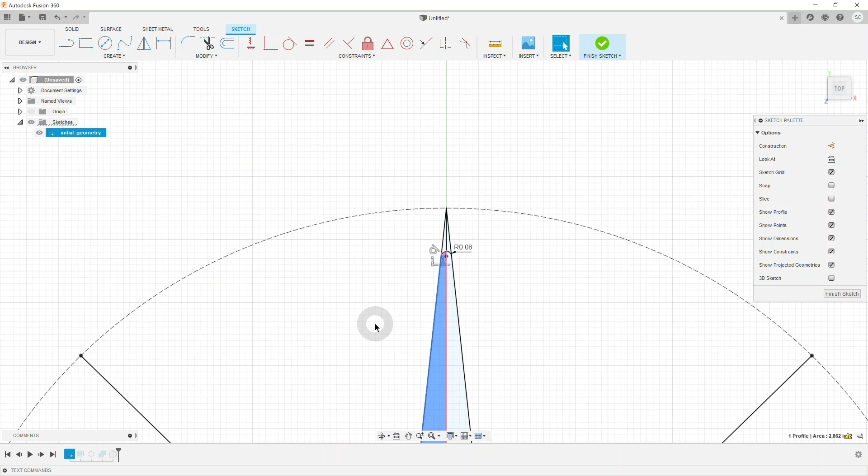So we'll do the same on this side just to double check. Pretty sure I set that up right. Yep. So now we know all of these shapes, 1, 2, 3, 4, have the radiuses they need at this end, and then the star in the center has it. We're going to have to bake it into this as well.

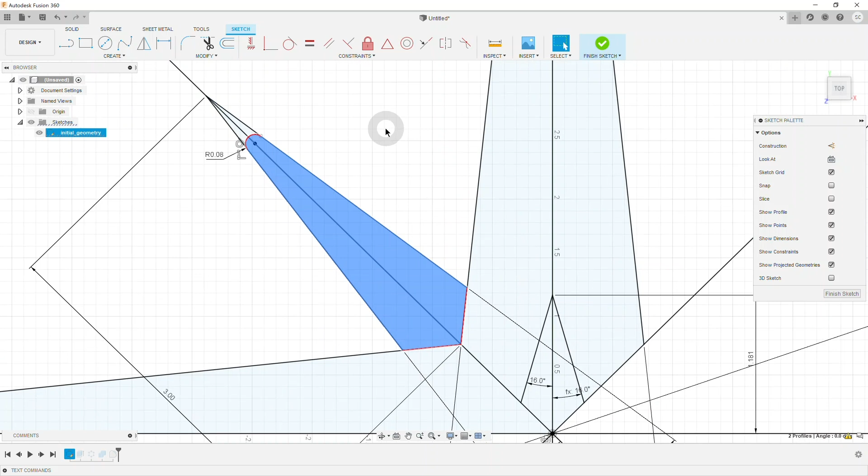So first, I'm going to extrude these. Worth noting, if I was to extrude this like this, I would be creating one piece of geometry. I'll do it just to show you what I mean. I've got two elements selected. I'm going to do it negative 0.25 inches. If I zoom around, I'll see that. It's choosing new body, so that's all good.

Now, what's happened here is I've got center star, so that's all as we made it. Now I've got this new body, but each piece of that didn't make a separate body - it all came in as one. So I'm going to go back here and find the element that produced this. I'm going to right click on it and go edit feature, and I'm going to remove this one and then go OK. So now I've got one piece. That's fine. I can actually make that do a little more work.

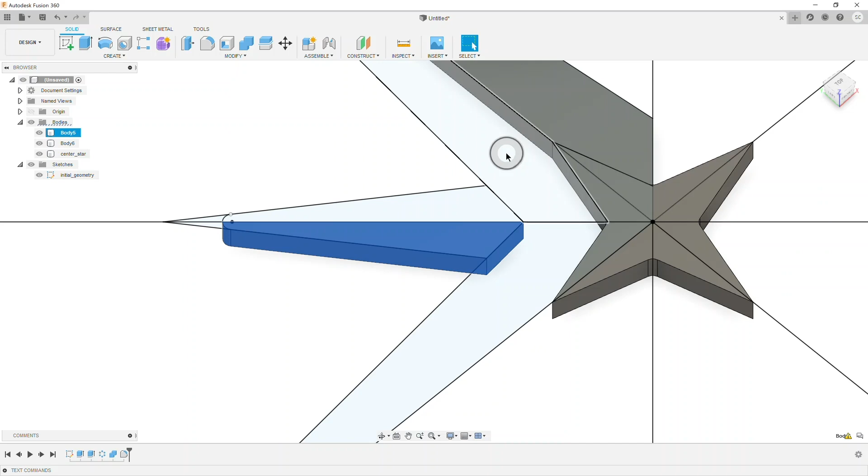So I can go edit feature and select this one. So this will create two pieces of geometry. Because they don't intersect, we get that and that. And then I'll have to do two more extrudes. I can hit this button or hit the E button and then leave everything default, negative 0.25 inches.

Notice it's telling me it's trying to cut. So what's it trying to cut? It doesn't look like it collides with anything. Let's zoom in here and see. Because we put that fillet there, it would actually be coming in here, and you can see it would be cutting that area out. So we don't want to do that. We want to do the opposite. We're going to eventually get this curve to cut away this corner so that our pockets match.

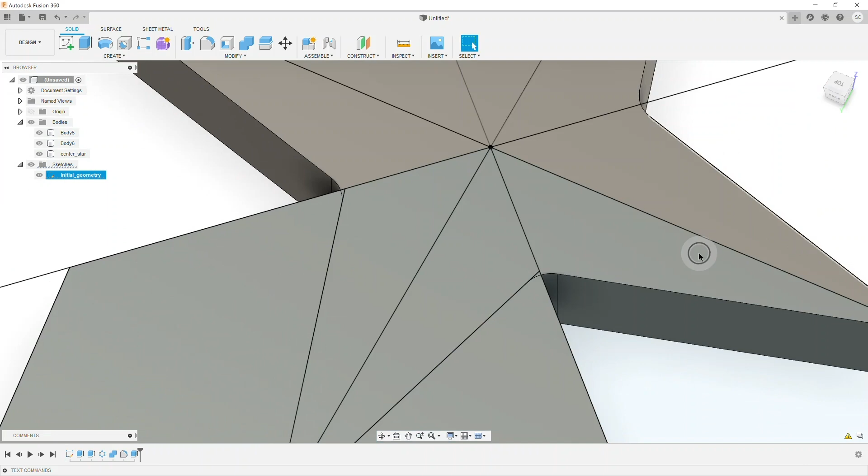So we're going to create a new body. So that means there's just two bodies that happen to intersect there. So now we have one more shape. Extrude, negative 0.25 inches. Let's leave it in a new body, and that means all those pieces remain independent. They don't get bundled together.

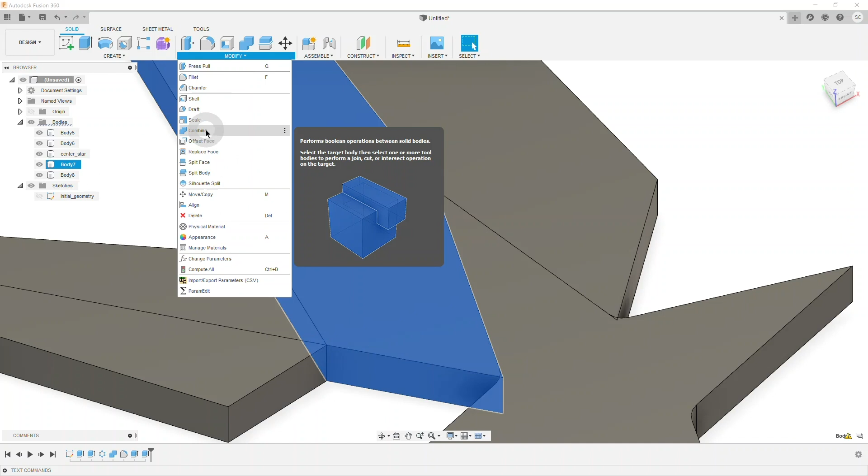Right, so this is all the core geometry. We're now going to hide the sketch because it's not as helpful anymore. And we're going to cut away these corners using combine again, and we're going to get this center star to cut away that sharp point so that they all mate together perfectly. So for this one, we're going to go modify, combine. So target body, tool body, star.

At the moment it's trying to combine them. We're going to cut. So you'll see, it's kind of cool. It previews it, and when you're in cut mode, the red element shows you what geometry is being removed. Now, I have the option of throwing away the star, or I can keep it. So the tool body is the star, the red thing, and we're going to want to do it on this element too and use it elsewhere. So we'll keep it around. So that now perfectly mates with this, and this one needs the same treatment.

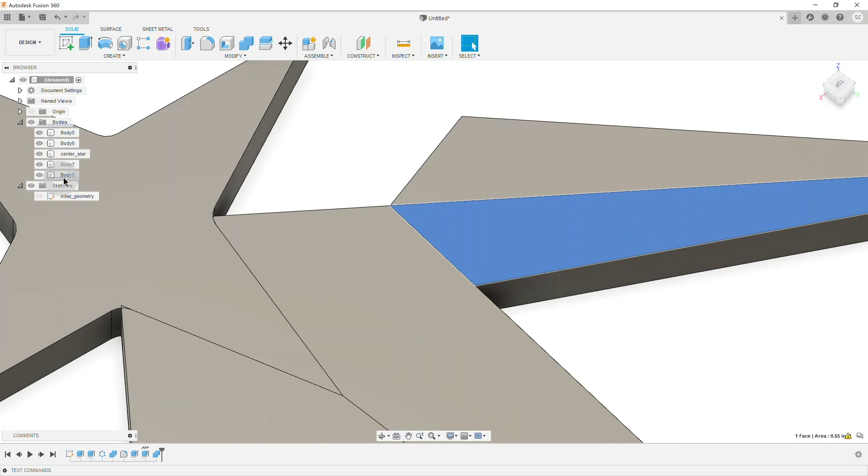Notice if I select a face here, I don't have the whole body selected, just the top face. I can select it here, but you'll notice if I have a sub-element selected, I get this little dash underneath it. So if you ever need to identify, I haven't named these yet, we'll do that in a second, but if I need to identify which one is which, just look for that blue line. Okay, so we'll do that again.

So I've got the top surface selected, and then I go modify, I can select the whole thing, sorry, and then go modify combine down here. Select the geometry I want to cut it with. My settings remain in this case, so I'm keeping the tool body, which is this, and I'm cutting that. Hit OK. Now things get fun. We can make it look cool. So we're going to start by naming these. So I'm going to make this dark. So small, dark. And by dark I mean, I'll show you what I mean.

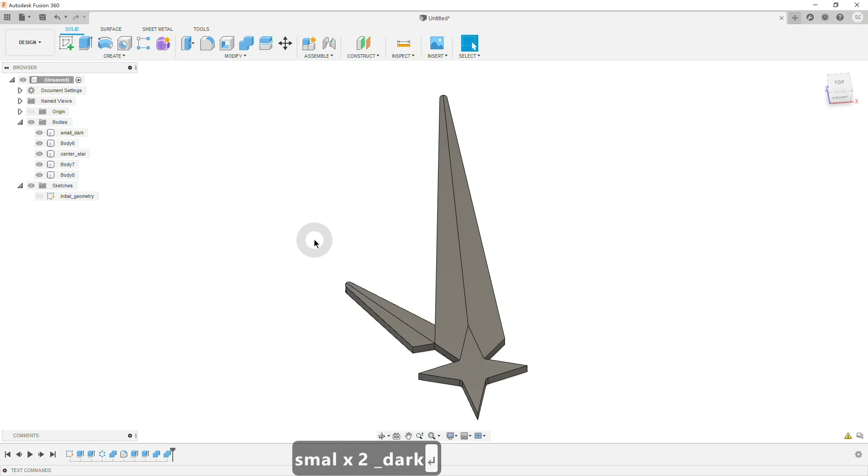If I hit A, this brings up the appearance menu. So with this, we've got a bunch of materials here. We've got a standard one already there. But if we scroll down, there's wood solid. This is really handy for this type of work. You'll remember the examples from here. These are all previewed using exactly this technique. So we can predetermine what direction we want grain to go. We can see the different materials, see the end grain. This is actually really powerful for getting a feel for what you've produced and confirming you have exactly what you want before sending it to Origin.

Now I can go for a finished solid wood. So the solid ones are particularly useful. Now there's two different types here. I've got 3D ash. You'll notice it doesn't have any icon to the side of it. And these other ones have icons to the side of it. So say I wanted to grab some koa, I have to first download it. That's all that icon's saying, it's not currently local.

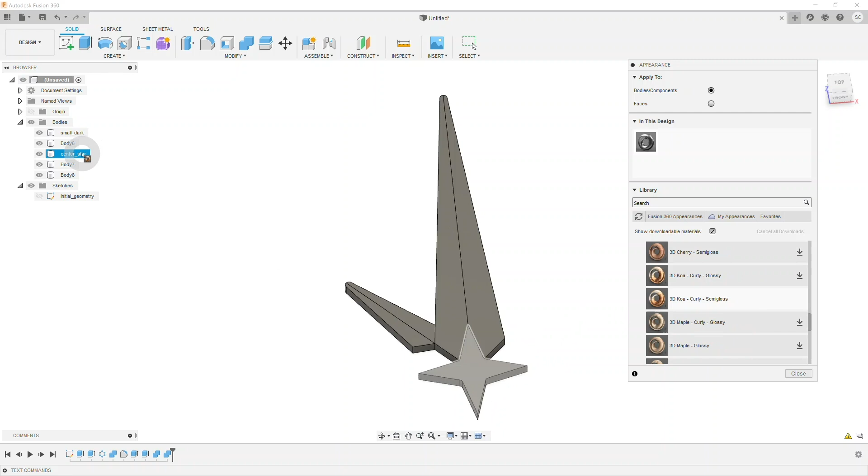So I'll just click and drag that as an example onto my center geometry. You notice the whole thing highlights. We can either drag and drop it here, or we can drag and drop it here. Now what it's going to do is find the longest length and align the grain that way. So what's kind of cool here, it's a pretty reasonable representation of it.

So you can see the little pores of the end grain, and you can see the length of regular grain. We can also right-click on it. I've got to close this menu to do this for some reason, and then bring up texture map controls. So this shows me its standard alignment, and then we can mess with that just by dragging these handles. You notice they update. So you can do whatever you want there, and it will respond accordingly.

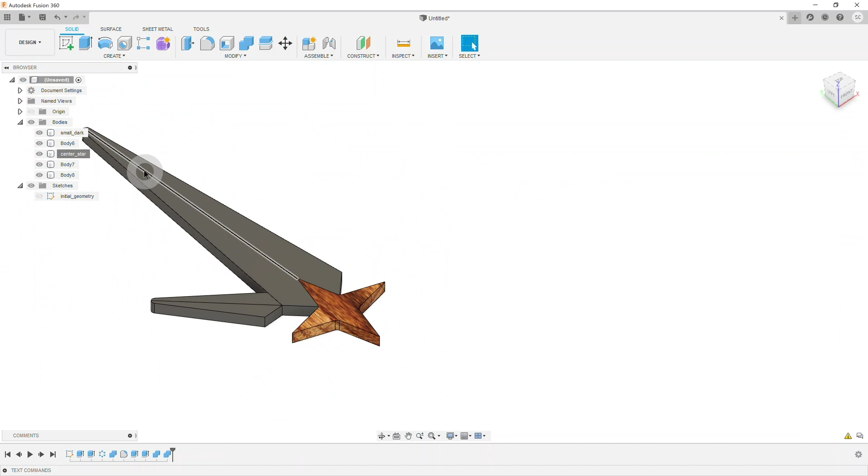So this is a really cool way of quickly getting a feel for what it is you're creating here, using materials pretty representative of the materials you'll use. A again, bringing it up, and you'll notice these are the materials used in this design. So I'm going to go back to the top of this list, grab some ash, put it on this one. Oh, sorry, that's the dark one. So I named that small dark.

So I'll put that on that one and that one, and then put some mahogany on the two ones we want dark. So you can see there the grain has automatically selected the longest length. So usually that's a pretty good starting place. Close that. So now I've got my dark and light elements. I've got sort of a center koa for some reason, and I'm just going to confirm I've got these named right. So small dark. So this one's large light.

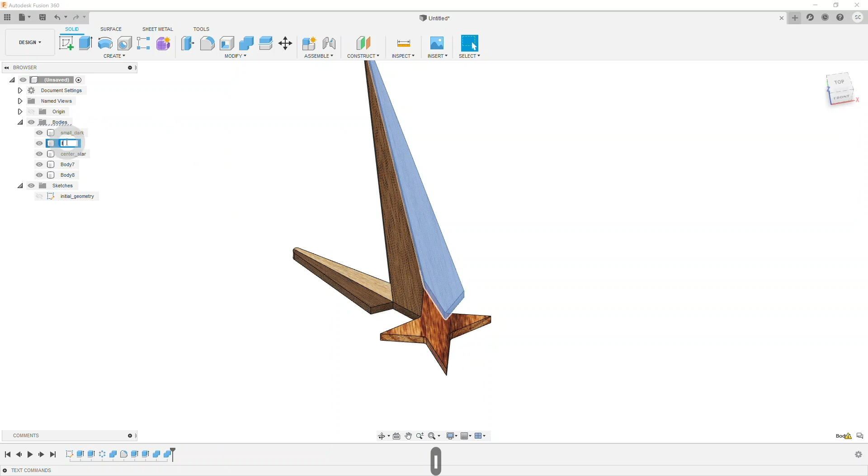And then if I double click on these slowly, I get to edit them. So then body 7, that'll be large dark, and then small light. It's a good idea to name them prior to duplicating them and stuff, just because it avoids the need to name all the duplicates, because they're going to come in with small dark 1, 2, 3, 4 as we duplicate them. So let's do that.

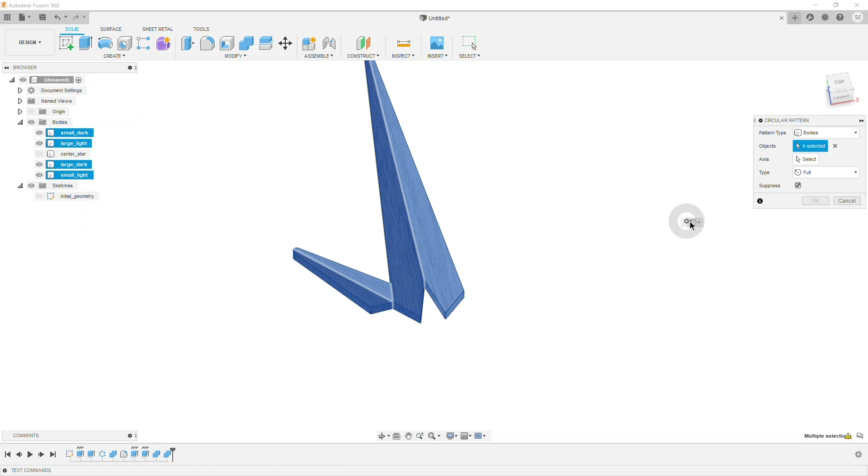I'm going to hide the center and then select all of this. If I hold down Control, I can toggle on and off that center, the selection. Now I'm going to pattern these. So create a radial pattern, circular pattern. And I'm going to choose an axis that goes around the blue one here. It's going to default to 3, so that looks a bit odd at the moment. Bump that up to 4. Now we're talking. That's what we're looking for.

You'll notice the direction of the grain has updated. So we could go through and adjust all that. So I could right-click on this and go Texture Map Controls. You'll notice it's kind of inherited from this object. So yeah, a little bit odd there. And go OK. Or you could go through and do that all by hand if you wanted to see that represented. Now we are basically ready to export these elements.

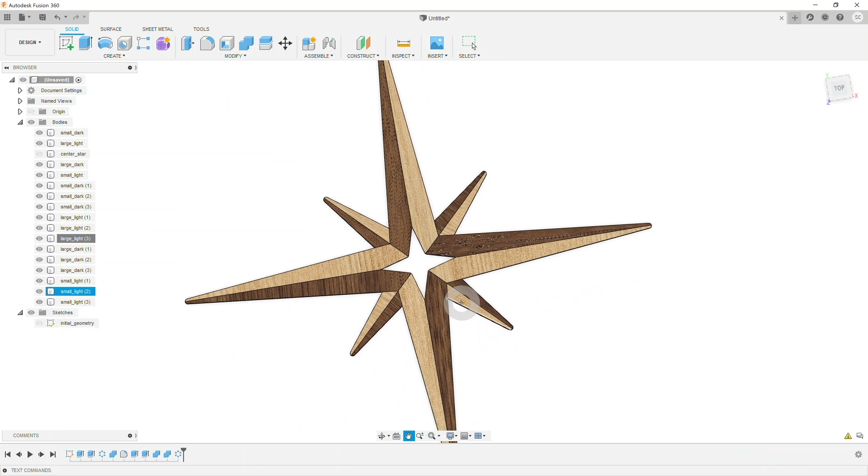One little pre-flight check that's worth considering. I'm going to turn the center back on and select everything. So I'm in solid modeling mode. There's some really handy inspect things here. I'd encourage you to dig in here and have a look. I can do things like interference checking. So with all of this geometry selected, I can compute any interferences. So there are none. That's what we're looking for.

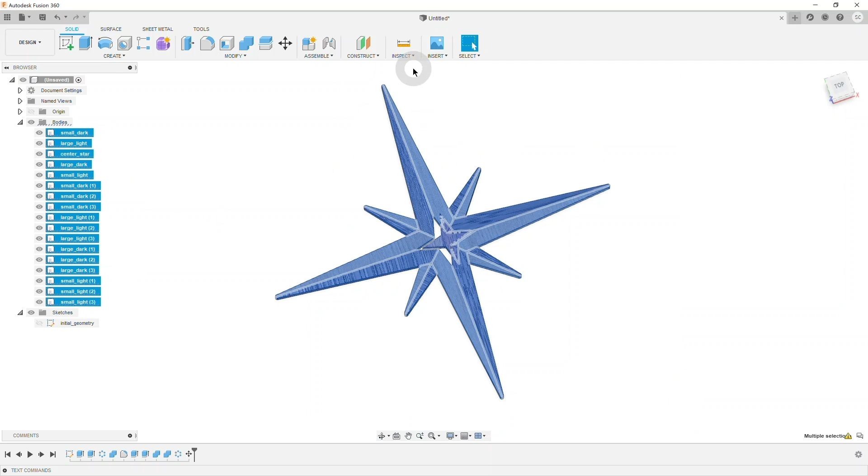I'm going to cancel that and actually produce a problem. So I'm just going to move this center point. So just move copy and then move it in X by 0.3. So this will be pretty exaggerated. I'm once again going to select everything. Click and drag everything. Control A is a common shortcut for that. And then I'm going to do the same interference check. Now with everything selected, compute.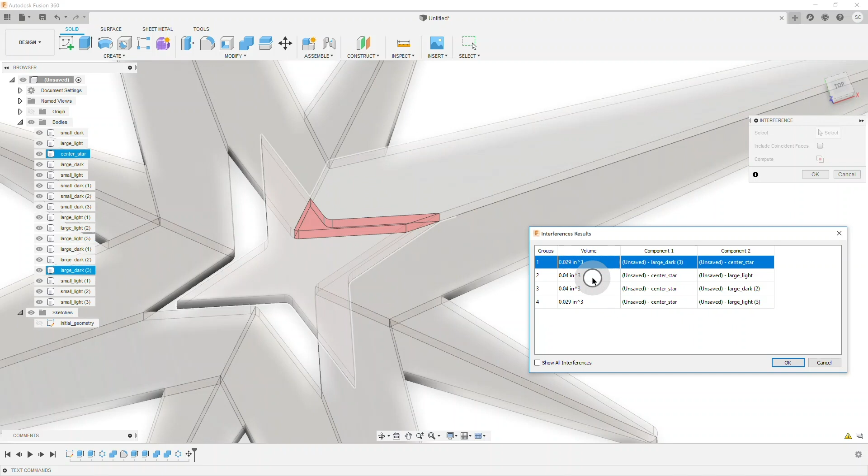Okay, something's up. Now that's really cool. So I can quickly assess what is colliding with what, and I can highlight individually. So it's telling me the volume of the intersection, and it's telling me the two objects that are colliding. This is a great way to go through and quickly understand where you've got problems. So it's one of those things that only a full-on 3D CAD app can assess this type of detail. So that's one of the areas that Fusion gets really helpful.

Now the other cool thing is here, we see now we've accumulated quite a lot of history. So all the different features that we've created, all the different elements we combined, the patterns, this move. So I can double click it and manipulate it, or I can right click on it and delete it. That puts it back where it belongs.

One quick note, Fusion's actually very good at saving things in case it crashes or anything. So I'm going to save this as compass test save. Now it's going to come up here, compass test version 0.

So Fusion's also really cool in terms of saving versions. I no longer need to think about renaming or anything on this. So it's gone from 0 to 1. So if I make a change now, let's see here, I will hide this. So if I make just that change and then save again, this is no longer talking about any naming of the file. This is just a note to yourself, a description.

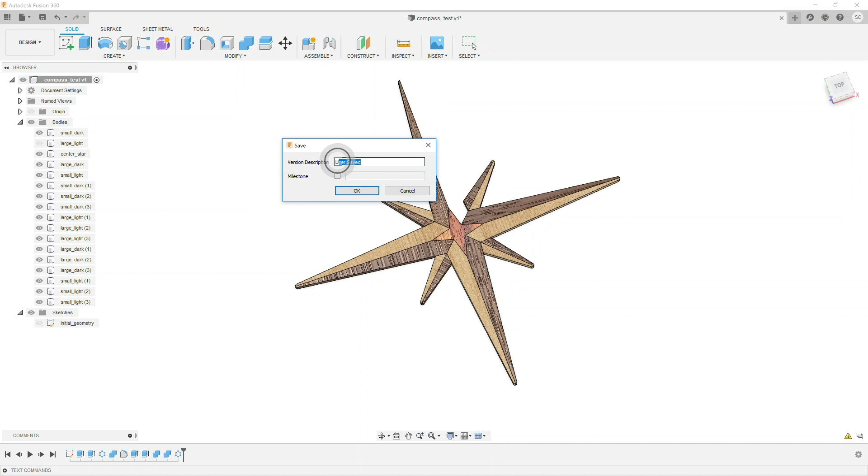So hidden part. Now keep an eye on here, we're on V1. So this is going to update to V2. It takes just a little second. The cool thing is you don't have to think about versions at all. So don't add versions yourself, just keep hitting save and it will add its own versions.

Now with this top surface saved, I've got large light, one face. So it's the face I intend to cut from. So Origin will be resting on that element when I cut it. If I go Tools and then Origin Export, ordinarily you would see it in this state. So we export one element at a time and it's looking for bodies. So you'll see here, select the entity to export.

So if I select this, it's telling us it's going to convert that, it's going to color code it appropriately, save it as a correctly scaled SVG ready for cutting with Origin. The advanced options would be single solid body, a solid body layout, which would be if I wanted to export all of these. To do that, you'd want to move these around, turn them into components, move them, and nest them in a way that the cutter can get around them. But that is an option.

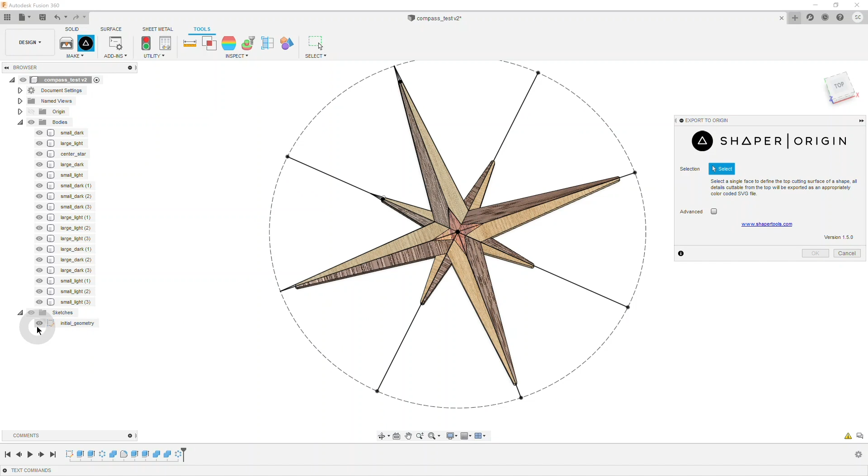And then if you ever get squeezed or there's some interesting geometry in a sketch or something you want to export, I could literally bring this whole sketch out and start messing with it in Illustrator by selecting the sketch. So I'm going to revert to single solid body, which is the default non-advanced mode, hide this, and then just go through and select this. So it's telling me I've got large light selected. If I go OK, now I'm exporting.

You'll notice it's named it automatically. It's going into the last folder I was saving in, and it's named it the name of the body. So this is why naming your objects is helpful. So I've just exported that element ready for cutting with Origin. I'll do the large dark. You notice it's named appropriately. That's the large light one I just exported. And it exports that quickly in the background. Very simple, very straightforward.

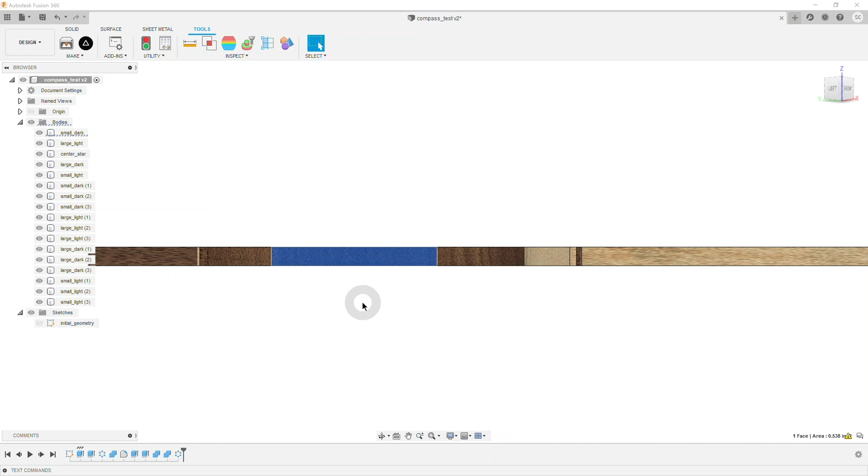So keep in mind, to select these shapes, it needs to make sense to Origin. And by that I mean the geometry has to be cuttable as though it was a plane. If I selected this, we're going to get some weird outcomes in that this face is going to be available, and then the total geometry will come out. But it doesn't make sense to cut this element from this angle. We're going to want to select it from the top, like that.

The eagle-eyed amongst you will have noticed we have yet to create the overall shape, the pocket. Let's do that now. So I'm going to select all of this, go back to solid, and then move and copy. I'm going to move it up in Z by 1 inch and create a copy. So now it's duplicated all those elements here. You'll see down here it's told me it's made a copy. So that's good. And I was selecting bodies. So that's good. Now we're going to just look at it from the side.

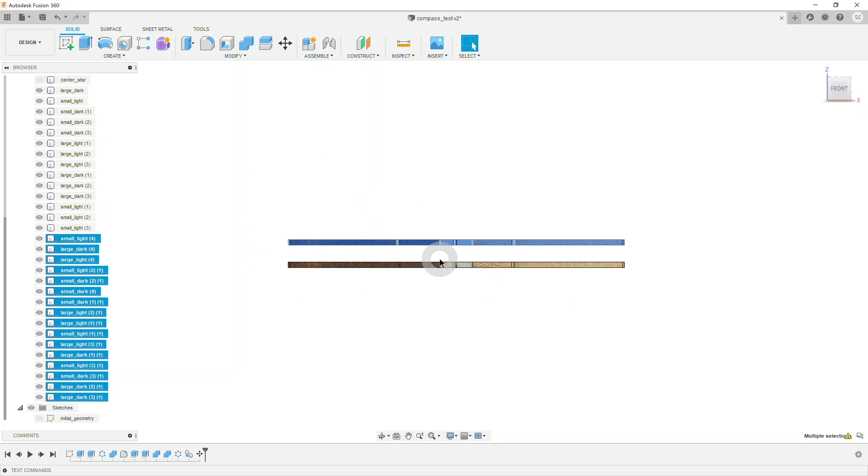It doesn't matter that I've moved away from that original geometry, because this will be cut separately in your floor. I now select all of those elements and then go combine. It's defaulting to cut and keep tools. I don't want to keep the tools, but I do want to join it. So this now creates one big shape we're going to use for the pocket. At the moment, it's going to export as a positive element.

So by that I mean it will be cut and coded as a black fill, and then when you bring it into Origin, you'll be cutting the outside of the line. So if you don't want to touch Illustrator or anything like that, you can bring it in and change the cut type on tool. So you would change it to a pocket, clear out the center, and then do an inside cut to get the final dimension using that 1/8 inch cutter we defined. So I'd say that's the best option.

You can also create geometry here in Fusion, and then we could use these shapes to cut a hole in it. So I'll show you the positive way. So if I go export that, you notice I haven't named that. I should name it, but I'm just going to name it on the export.

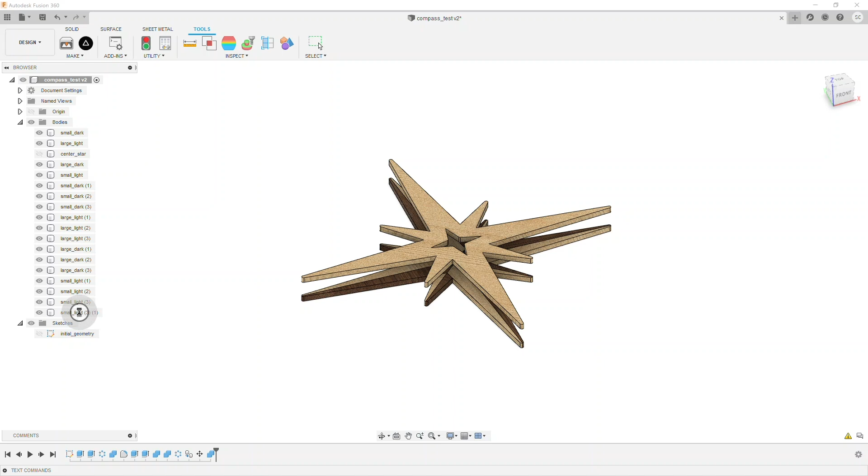Pocket. Okay. I'm actually going to name this pocket as well, so that subsequent exports get the same outcome. Now, I'm going to create a new sketch to show you if I wanted to explicitly create a pocket using Fusion. So I could go create sketch, select my same XY plane, create a rectangle, and I'm going to use the center point rectangle so that I know the center of it is going to align to the center of this geometry, so I can place it with Origin using the center point.

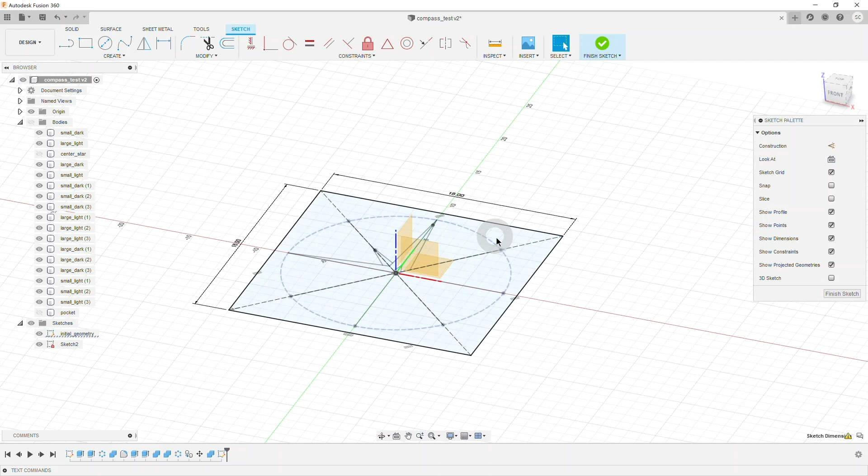I'm going to select 18 inches in that axis and 18 in that axis. Now we have a shape that is symmetrical and centered and fully defined. I'm then going to select the whole thing. Because there's only a rectangle and these lines here are construction geometry, that whole profile gets selected. If I was doing this rectangle in this sketch, all these other pieces of geometry would need to be selected as well. So that's why I'm creating a new sketch to avoid the clutter.

Now if I go extrude and select that plane, go negative, I'll make it a larger piece of geometry. It's going to tell me that they're not visible. When I create a body, because my whole bodies folder is hidden, these won't be visible. So that's just a warning. If I turn my bodies folder back on, now we see all this geometry. But it's colliding. So I'll call this floor pocket.

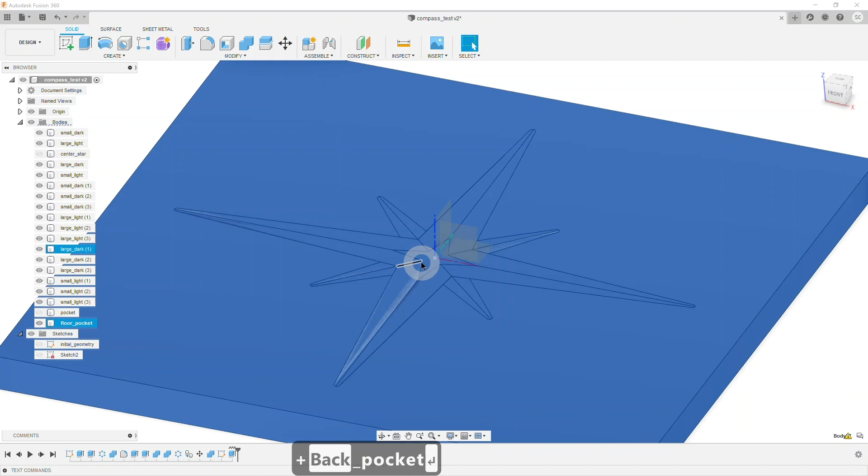And I'm going to combine this with all this other geometry. So this is achieving the same as we did exporting that positive pocket, but assuming we didn't want to go through the process of making that positive pocket. So this is just an alternative approach. Combine, and then the tools are these.

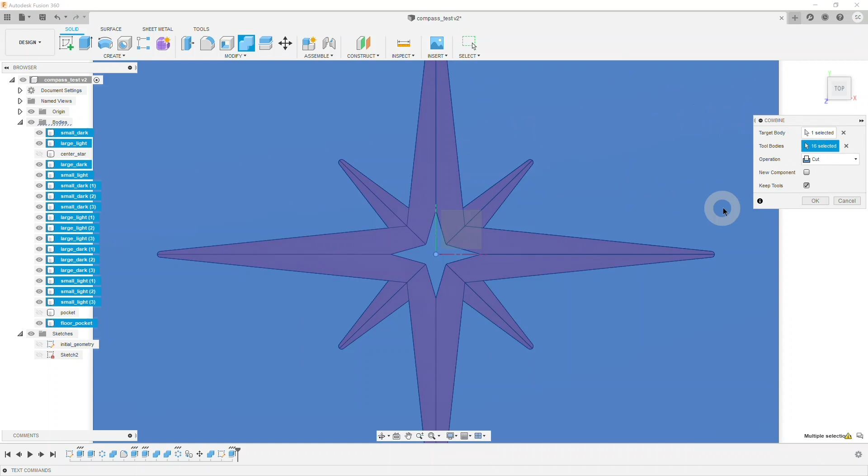So I'm going to go through and I'm going to go cut, and you'll notice they all start highlighting. I'm going to view it from the top so it's easier to select. They all start turning red as I select them. There's more sophisticated ways to handle selections, but for this simple intro, we won't get into it. So I do want to keep the tools because they are the positive elements, and that is enough to cut my hole. So once that processes, now you'll see there's not that weird intersection, and when I highlight that area,

this all matches. So just to make it clear, I'm going to move this down -3 inches, and you'll see what we're talking about there, and hide the origin. So if I select this, I will get an export with this pocket. I'll also get the outline. It will have a square available for me to cut the perimeter, but on Origin we would not want to cut that. We just want to cut this pocket.

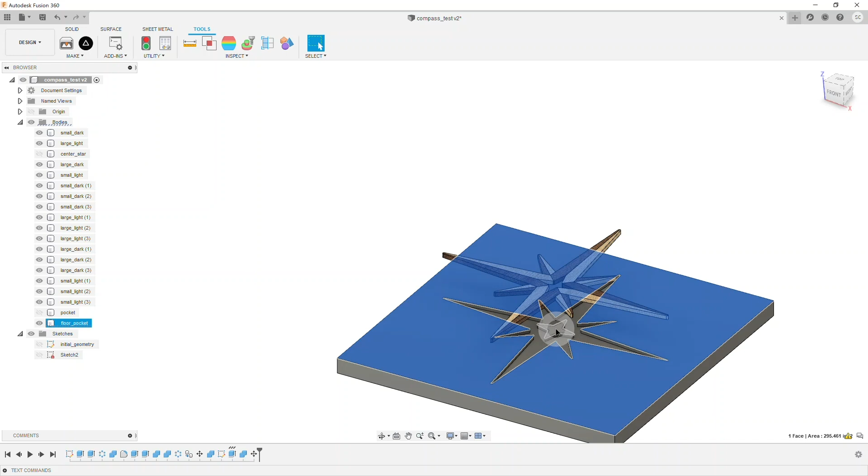If ever you find the geometry that you bring into Origin doesn't enable you to cut exactly what you want, chances are in either, say, Affinity Designer or Illustrator or something, you can manipulate these vectors and get exactly what you want. We'll just export this, and that's going to be called Floor Pocket. Go Save. So that then rolls into the process of actually cutting the positives and then the pocket in the floor. But that wraps up what we need to do for exporting the geometry from Fusion, creating and exporting that. So I hope that helps you understand the process.

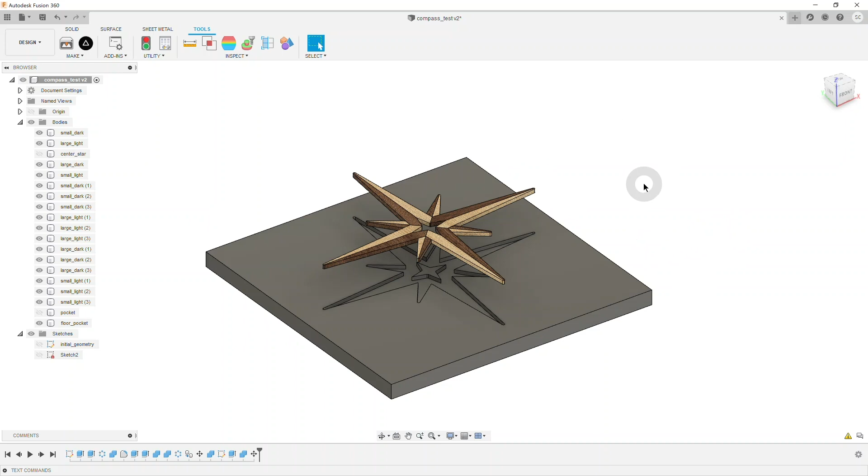It's actually pretty straightforward, and once you get confident navigating this data, you'll find that Fusion is really helpful in terms of the way it handles constraints and the way you can go back and manipulate things later. For instance, we'll see if we can blow it up just out of interest. If I was to say this was 22 inches, you'll notice this entire thing automatically updates. And we're obviously cutting beyond the edge of this. We'd need this to be larger, but you'll see how flexible this whole process is in that you can go back and make those kind of sweeping changes and have everything propagate through your design.

So that's Fusion. We'll put this back to the correct one. And we will save this file. Complete. That's my introduction to creating inlays, medallions with Fusion.